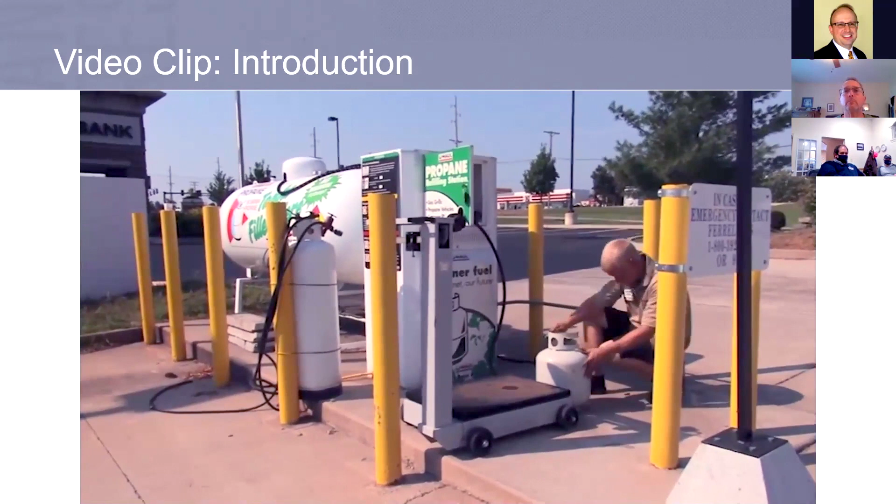One step in the pre-fill inspection identifies cylinders that are due for requalification before they can be returned to service. The purpose of this video is to be a supplement to the cylinder requalification textbook. Please make sure you thoroughly understand all of the principles, instructions, and guidelines that are in the textbook. The textbook also serves as a reference guide, as it contains many of the charts, tables, and measurements required to requalify a DOT cylinder.

Okay, pretty straightforward stuff. These are the organizations that you'll probably deal with in terms of cylinder requalification: NFPA, OSHA in terms of workplace training, DOT for transportation, EPA, don't spill anything, and the Compressed Gas Association, of which this document really takes its information from.

Now let me start off with some really good news. NPGA was very successful in convincing PHMSA, and this has been going on for a long time, that it used to be you had to have a copy of CGA 6 at the facility where you are doing a recertification of cylinders or inspections by external visual. Those books cost about $200. If you look in here, that's not required anymore from PHMSA. There's a link that gives the formal interpretation of that, or the formal directive.

As long as you have the PERC book, you do not need to have the CGA 6. What I would recommend is that in every place you do that recertification, you have the PERC book, and also download the link that talks about the PHMSA directive, which you'll see on the bottom of this handout. Bill, I believe I sent some out. I'm happy to send some more, and it's on NPGA's website.

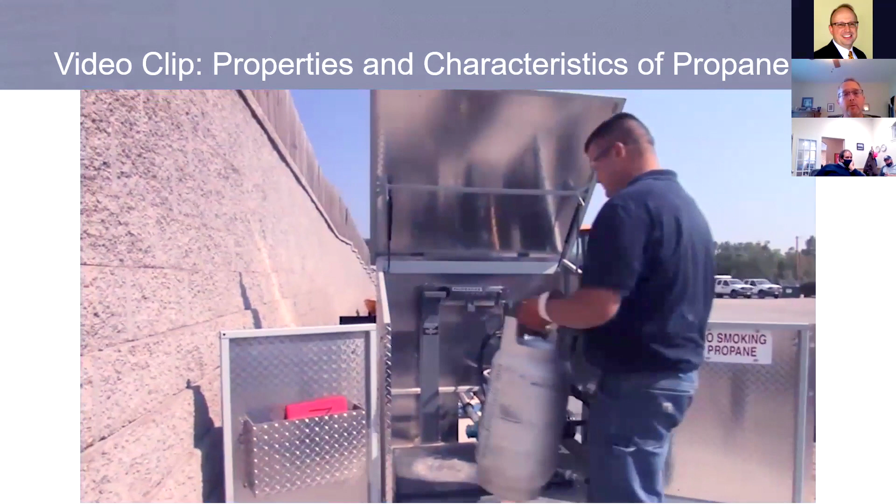The safe dispensing of propane involves knowing its properties and characteristics and being aware of safety procedures. A safety data sheet, or SDS, is available from propane suppliers or distributors and must be available and accessible to all employees at the workplace. The SDS provides important information on propane, including physical properties, health effects, first aid, safety precautions, and personal protective equipment.

Propane is stored as both a liquid and a vapor. As propane liquid turns to vapor, it expands 270 times. Because of the large expansion rate, a liquid propane leak can be more hazardous than a propane vapor leak. Propane containers are usually filled to only 80% of their capacity to allow room for liquid propane to expand with an increase in temperature.

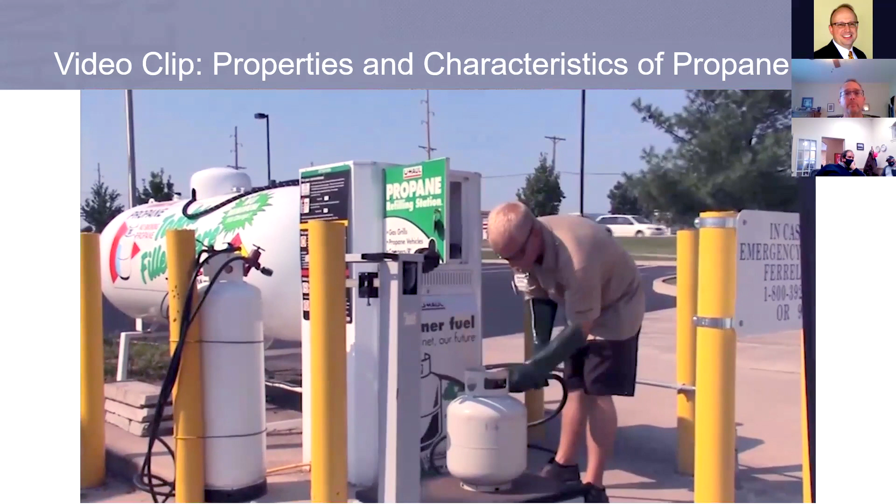Propane is non-toxic, but its vapor can be dangerous to inhale because it can displace oxygen. Since propane vapor is heavier than air, propane released in a confined space may settle in low-lying areas. However, if there is sufficient air movement, especially outdoors, the vapor will quickly dissipate in the air.

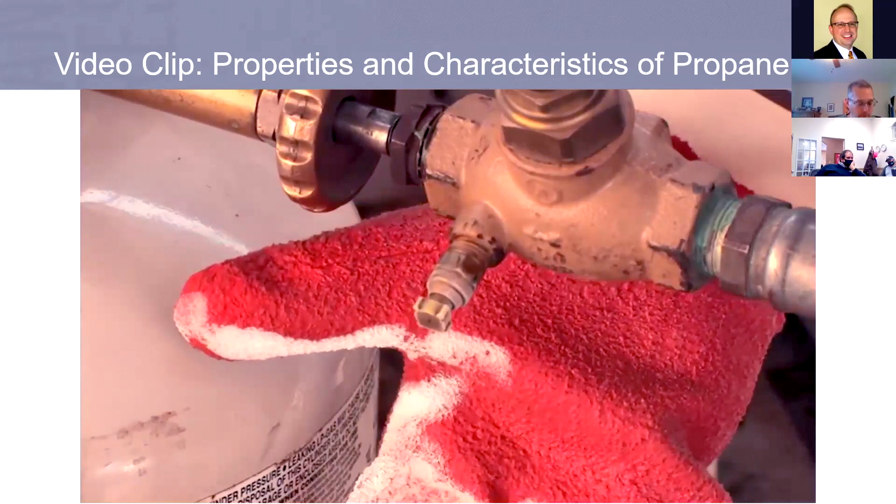Propane liquid becomes very cold when released to the atmosphere. This means if it comes in contact with your skin, it can cause frostbite or freeze burns. For this reason, appropriate gloves or other personal protective equipment resistant to propane should always be worn when filling containers. Your employer may require other safety equipment depending on your specific responsibilities, so be sure to check with your supervisor.

Propane is a fuel. It will ignite and burn under the right conditions. Three ingredients are needed to start and sustain combustion: propane, oxygen, and an ignition source. In order to minimize possible ignition sources that could lead to combustion, customers should be restricted from the immediate area around the liquid propane transfer areas.

A strong, unpleasant-smelling chemical is added to propane so you can detect it. The chemical added to propane makes it smell like rotten eggs, a skunk spray, or a dead animal. You should respond immediately to even a faint odor of propane. If for any reason you cannot recognize the smell of propane, notify your supervisor immediately. Both you and your customer's safety could depend on your ability to smell propane in the event of a leak.

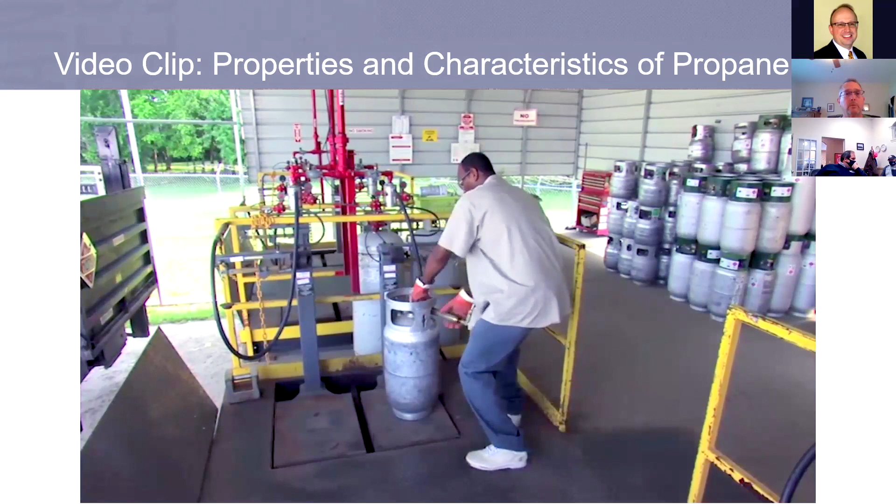You should be aware of any potential ignition sources anytime you are handling or transferring propane. Some examples include a person smoking, open flames, internal combustion engines, and static electricity. Make sure you eliminate any potential ignition sources before handling or filling propane cylinders and tanks. In the right conditions, a source of ignition, such as a static discharge or spark, may cause the ignition of some fuels, including gasoline and propane.

For more information on controlling static electricity... Okay, you all got that? All right, let's get right into it now.

DOT cylinders, we're starting on page 5. I know you guys know a lot about this, but let's go over it anyway because we've got to do it for the class. An important part of the cylinder requalifier's job is to recognize the various types of cylinders and their markings, and we need to make sure we can tell whether or not the cylinder is still within date of its last requalification.

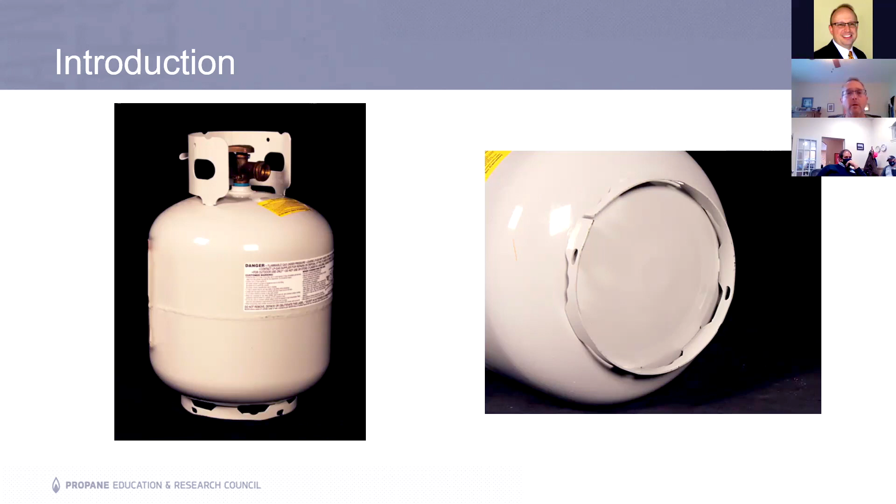We want to look at things, as you can see on the bottom here, like these rings under here that keep the integrity. If those are damaged, that's a no-no. All right, common elements of DOT cylinders.

Valves: exchange cylinders have one combination service valve, pressure relief valve screwed into the top. Vertical cylinders from 4 to 40 pound have to have OPD valves, right? We all know that. We want to make sure we know that.

Protective cylinder collar is a wide metal band welded to the cylinder body. Collars are where we have a lot of that information. You'll see, and we'll go over that in just a moment—you can see the DOT number right up here, and it'll have other information on it. As we know, we lift by the collar. Okay, ID markings—all the ID markings that you're going to look for are on the collar.

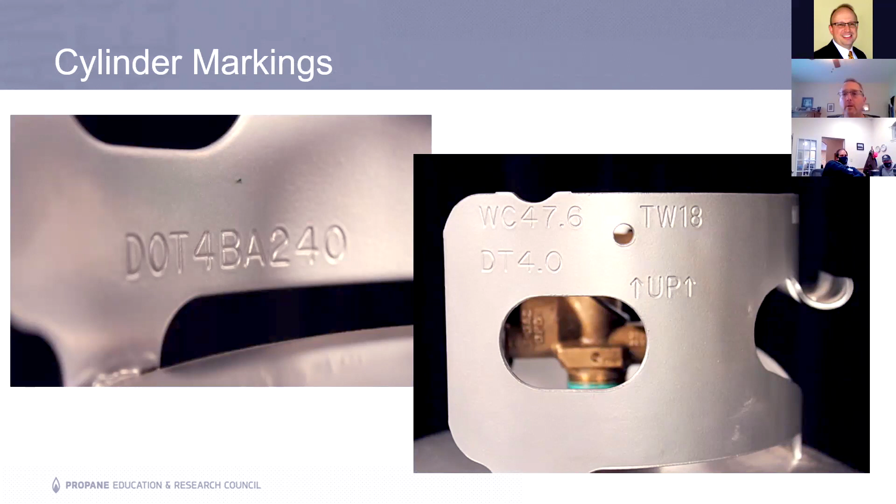Markings are required by DOT. The ID card for the cylinder has all that stuff: cylinder specification design code, service pressure, tare weight, water capacity in pounds, and test requalification date. That's where you find all those things.

Okay, let's go to pages 8 and 9 in your book. We're going to do a quick discovery activity. I'm a big believer in making sure that folks are doing stuff.

On portable cylinder markings, in the top left corner of the cylinder, you'll see cylinder tare weight is 17 pounds. Look on the collar: where's A? Tare weight, 17 pounds. B, water capacity in pounds - where do we see that? B, water capacity, WC. C, manufacturer's name.

We're going over to the other side of that collar. This one's owned by General Cylinder. Specification design code on letter D, on the third picture, has DOT 4BA240, manufacturer date on E, and on F, requalification dates. These are incredibly important - you're going to figure out whether or not the cylinder is within requalification date where it can be refilled. Let's take a look at that right now.

Requalification markings - a few years ago PHMSA put out a rule saying the volumetric expansion test went from 12 years to 10 years, and the internal hydrostatic test went from 10 years to 7 years. They have now put out a correction on that, going back to the original 12 and 10-year dates. The reason we have it this way in the book is because that was not adjudicated yet, and now we know the original dates are what those dates are.

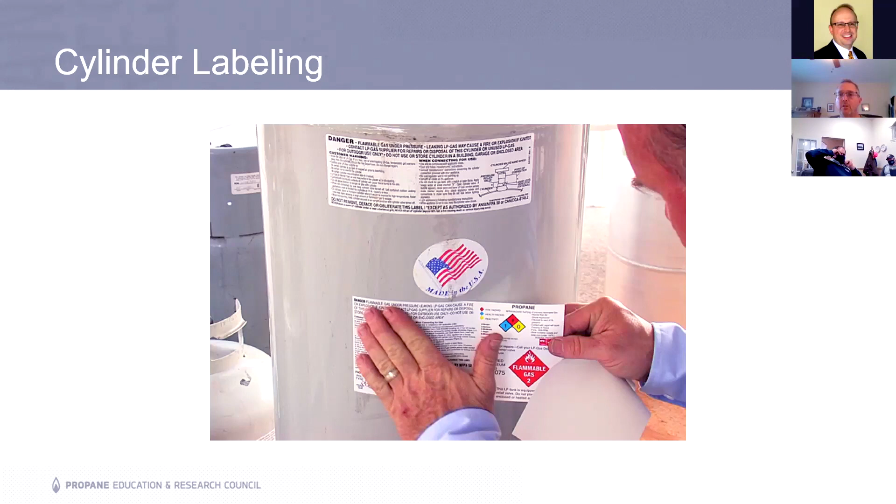All right, DOT requirements - we're going to get into it right now. And I know if I'm being repetitive, it's because I want to really make sure you really understand this information.

The process by which a DOT container must be taken out of service, retested, and found suitable for continued service on or before the required date - that's what we're talking about.

Most of what you folks are going to do is really look. You're not going to be doing the requalification, and you probably may not be putting a number on the collars. Let's talk about the different types and the dates of when a cylinder needs to be requalified, and the various other numbers on the cylinder.

We have cylinders 4B, 4BA, 4BW, 4E. Those will be requalified within 12 years. After that, volumetric testing. There are others, every 5 years after, if qualified by external visual inspection, indicate the date following. Pretty straightforward - you'll know what type of cylinder it is, right?

You'll know what type of cylinder it is, whether it's 4B, 4BA, 4BW, and where you'll find it on the collar, as we just went through a little while ago in the learning activity.

You have to be trained - that's why we're here, we're going to go through this training course. I know some classes will do this in 5 hours or so. My sense is 3.5 hours is enough information that I believe you'll be fine with this. And I know that a lot of you will go back after this class to where you are and have somebody do some hands-on training, which is also vitally important for your RIN number.

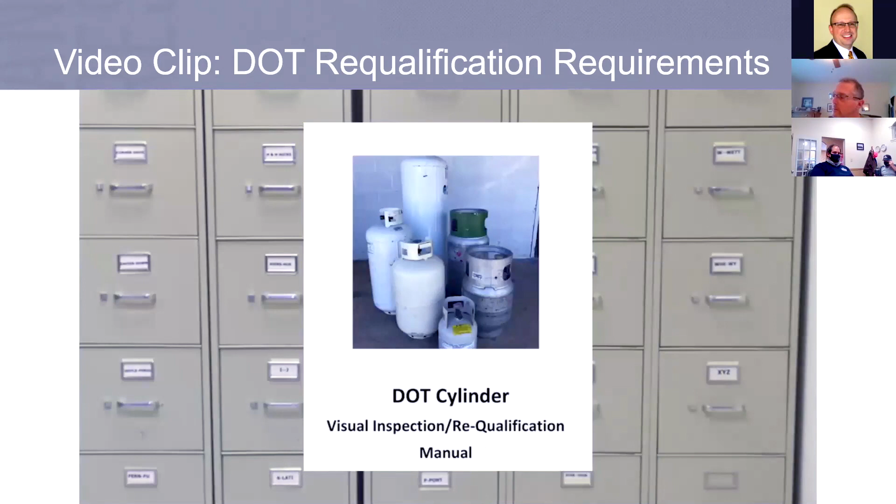A current requalification identification number, or RIN, issuance letter where applicable. Facilities must reapply for the RIN every 5 years.

Requalification record pages for external visual inspections must document the following: date of requalification, cylinder serial number, DOT specification or special permit number, marked pressure which is included in the DOT specification number, actual dimensions of the cylinder, manufacturer's name or symbol, owner's name or symbol if present, result of the visual inspection, cylinder disposition with reason for any repeated test, rejection, or condemnation, and legible identification of the test operator.

The option to use a single date for each record page is acceptable if each requalification inspection on that page is done on that date. The use of ditto marks or a solid vertical line to indicate repetition of the preceding entry is acceptable for the following entries only: date, actual dimensions, manufacturer's name or symbol if present, owner's name or symbol if present, and test operator or inspector. Blank spaces may not be used to indicate duplicate results of repeated operations.

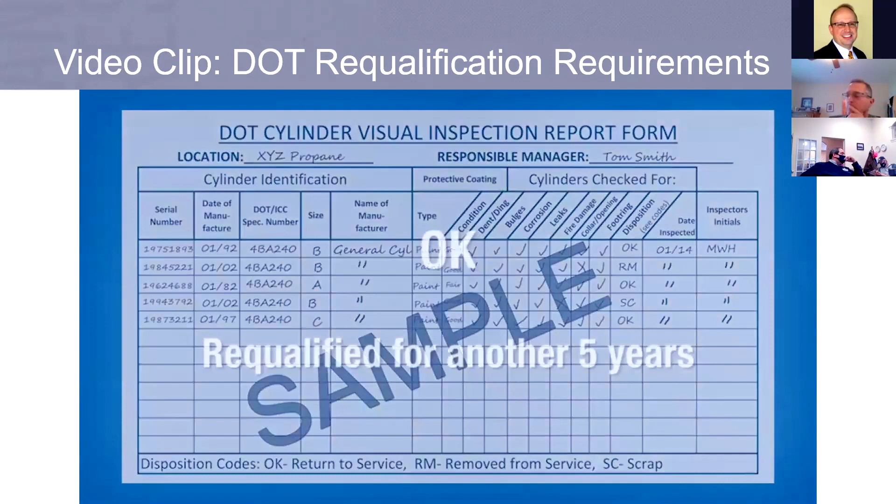OK - the cylinder has passed the inspection and is requalified for another 5-year period. R or RM - rejected or removed from service; the cylinder must be repaired or rebuilt and inspected again before it can be requalified. SC - scrapped or condemned; the cylinder must be permanently removed from service by marking the cylinder or rendering it incapable of holding pressure.

Requalification records must be maintained at the facility until either the expiration date of the requalification period or the cylinder is requalified again. That makes sense in terms of the things you could use ditto marks on, because you're going to be the same person.

Remember, it said you need to have this CGA book at the facility. But we shared with you the note, the fact sheet from NPGA, hats off to them, who approached PHMSA and said, look, we've got this great PERC book. We did it, and it's based on CGA. We think that should be acceptable to have at the facility where requalification is occurring.

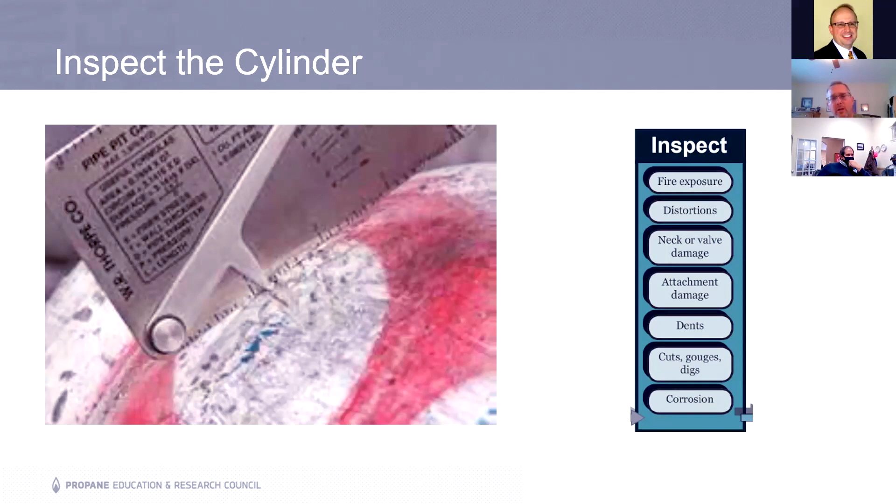If it reveals any corrosion, the cylinder should be emptied and weighed. Any corrosion, emptied and weighed. And again, we're going to get into some more of those specifics.

We're going to leak test the cylinder. I served as a subject matter expert on a lawsuit where somebody did something they shouldn't have done to the cylinder. And the fellow that filled the cylinder swore up and down, even under oath when deposed, that he leak checked all of that. He did all that. But what didn't he do? He didn't write it down. He didn't write it down.

And you know what, I hate paperwork. I really do. It can be the most tedious thing in the world, but it is just critical, and I can't emphasize that enough. Whether it's doing a gas check or leak check or doing this, the documentation is critical. And that is part also of being professional.

In the process, when you look at the cylinder, you're going to mark it again: it's okay, it's rejected, or it's scrapped. Okay, cylinder disposition, that's going to be documented. And it's just a high-end overview.

Okay, cylinders that do not pass inspection are given a disposition of rejected, removed, or scrapped, marked appropriately, and if necessary, completely removed from service. Fill out the inspection report completely. Again, just a big overview here.

Let's go to page 29 in your book for another quick check for understanding. Match the cylinder requalification task with the appropriate part of the cylinder requalification process.

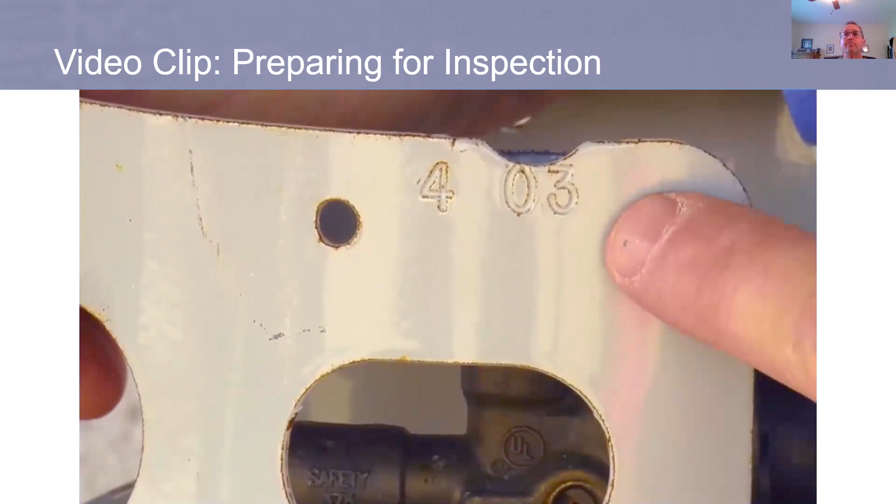Prepare for requalification. The first step is to make sure the cylinder is not leaking. If it is leaking, immediately take it out of service. Next, determine whether or not the cylinder is due for requalification based on the manufacture or requalification date. If the cylinder is not due for requalification, then a simple pre-fill inspection is to be performed on the cylinder to determine its suitability for continued service.

If the cylinder is due for requalification, then the cylinder must pass the entire requalification inspection in order to be returned to service. It is really not rocket science doing this. It's a matter of rote, doing it. It's like anything else - a matter of doing it the right way. And it's so easy for us.

Obviously, Bill, you're kidding, and I love a good joke. But it's so easy for us to take the path of least resistance on some of those things, but it's that one time where you're like, it looks okay. I got to leave, I'm going to my daughter's birthday party - whatever it might be, we all get kind of disorientated sometimes, or it's freezing cold outside.

My suggestion, and I'm not the boss, is take a break, take a deep breath every once in a while. But this is really, really critical work. It's like anything else - the 1,000th time somebody does a shortcut, it's the 1,001st time, and it could be that many times that they get into a jackpot.

And so, like I say, I don't want my doctor to take shortcuts. And even if my doctor's got to review a chart - as a matter of fact, just as an aside, there's been a trend in surgical facilities where there are checklists for doctors. Not what to do if you find a tumor, but just various protocols to make sure that they're doing it the same way, the same time. And I actually think that's a good thing.

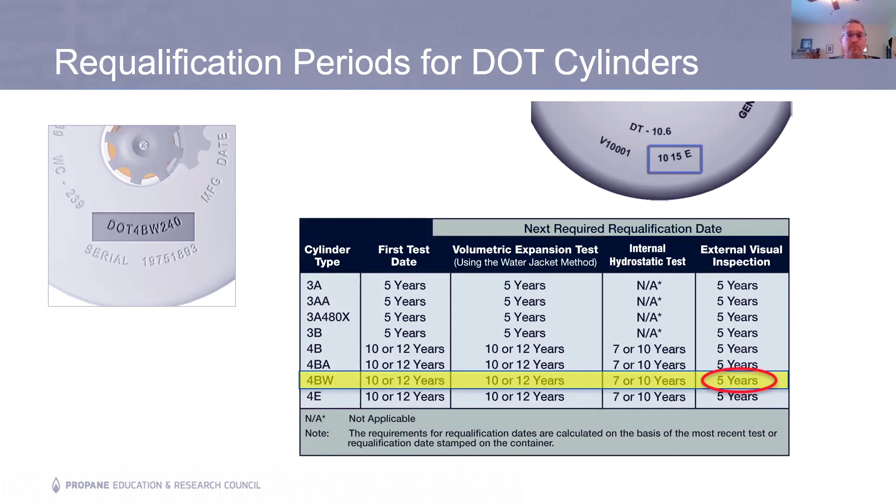Okay, let's go on page 35. Check for understanding. The following requalification dates are found on cylinders at your facility. All cylinders are 4B, 4BA, 4BW, or 4E. Using the chart below, check when the next requalification is required.

So 1014, no letter. So what does 1014 mean? Water expansion volumetric test, has to be within 12 years. This one was done October 2014. Is that within 12 years? Yes, it is. Okay, we're following the chart. We're seeing that it was requalified via the volumetric expansion test. Why do we know that? Because there is no letter next to the requalification date found on the cylinder, because it's marked 1014, no letter.

Here's the next one, 0716E. E, external, 5 years. Well, this is good for another, almost for another year, right? 16 plus 5, 21. And 512S. S means that it was requalified using the internal hydrostatic test. How do we know that? Because it says S on it. And those that are requalified using the internal hydrostatic test are good for 10 years.

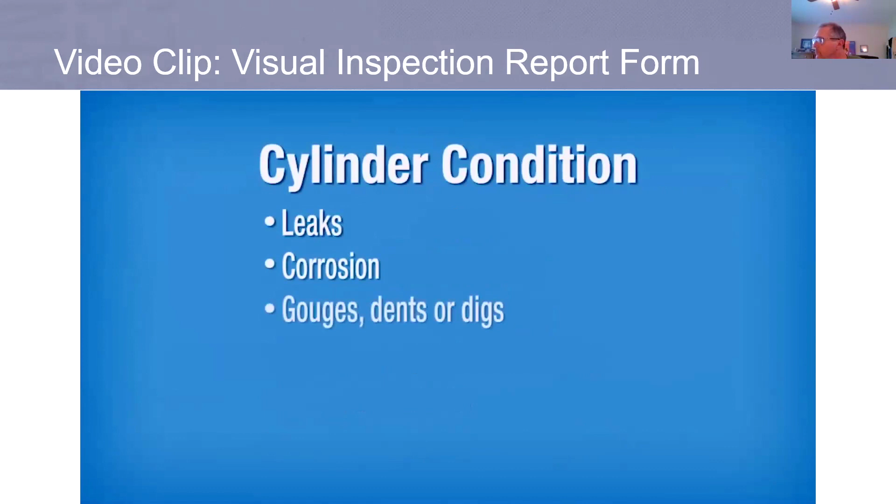Type of cylinder protective coating, including a statement as to need of refinishing or recoating. Conditions to check for on the cylinders, for example, leaks, corrosion, gouges, dents or digs in shell or head, broken or damaged foot ring or protective ring, or fire damage.

Cylinder disposition: return to service is indicated on the form with OK. Rejected, removed from service, hold for repairs is indicated with R or RM. The reason for the rejection must also be documented. Scrapped, condemned is indicated with SC. The reason for the condemnation must also be documented. Legible identification of the inspector.

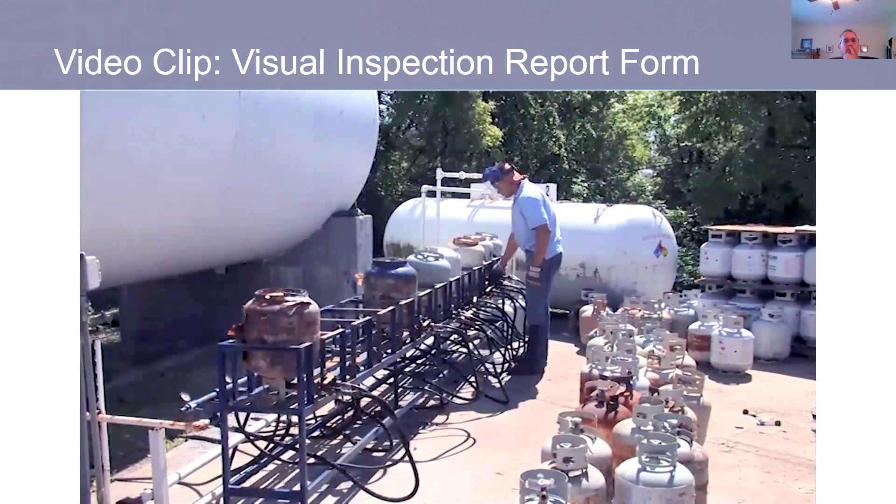If the cylinder to be requalified contains liquid propane, it may be required to be emptied or evacuated before proceeding with the inspection. Identify which cylinders need to be evacuated. Only evacuate a cylinder if you have the appropriate equipment and are trained to do so. Contact your fuel supplier if you are not qualified or do not have the equipment to evacuate a cylinder. Attempting to evacuate a cylinder without the appropriate equipment and training can create a hazardous situation.

All right, let's go to page 36. We're going to take a look at a visual inspection report. There's one here. I suspect you can make up your own, or go to any number of online facilities. So again, the first thing you're going to do is obtain that visual inspection report form.

We talked about it's either OK, it's good to go, rejected, removed from service, hold for repairs, and the reason that it was rejected, and scrapped, condemned, indicated on the form with the reason for the condemnation as well, and try to be as legible as possible.

Let's talk a little bit about cleaning and preparing the cylinder, and then we're going to go back to the book. To properly clean and prepare the cylinder for inspection, you must make sure that you are working at a safe distance from flammable liquids and combustible materials.

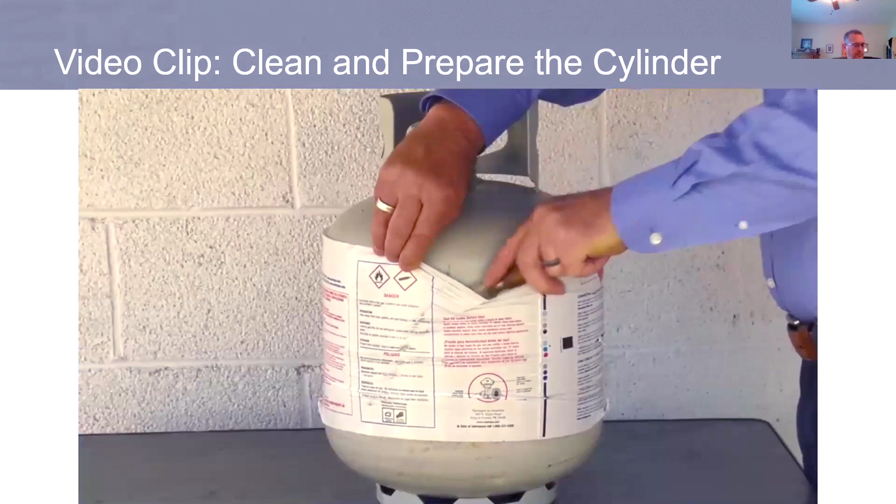Remove the cylinder sleeve if present. Remove any rust, scale, caked paint, or other foreign matter from the exterior surface of the cylinder. Remove any coating, rust, or scale from welds and joints where any part is joined to the cylinder body. Mark any area of the cylinder where a dent, dig, cut, corrosion, or fire damage is evident, using chalk or another non-permanent marking device.

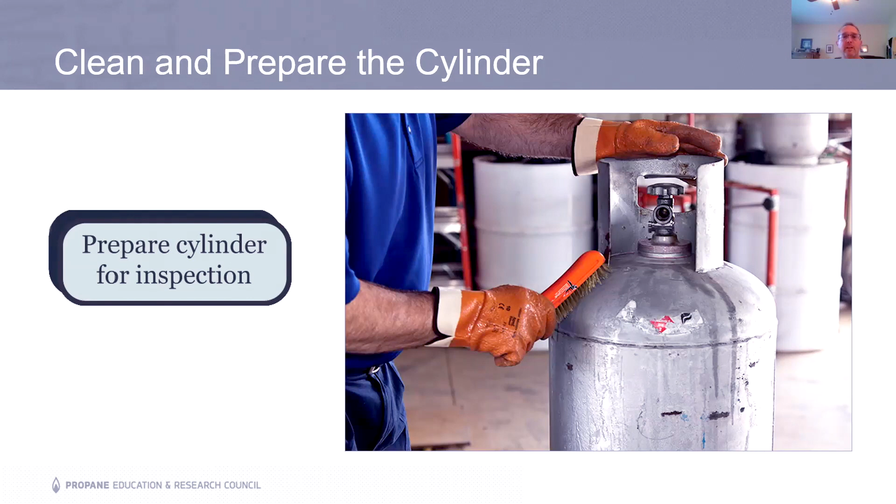Okay, let's talk about preparing the cylinder for inspection. Remove the cylinder sleeve. If present, remove any rust or paint, because it could hide some of the issues with the cylinder. Make sure you're working a safe distance, keep away from flammable materials. We know we want to remove the sleeves, and we want to pay special attention to welds and things of that sort. We're going to look for fire damage and other obvious things.

Okay, let's go take a look at page 38. We're going to do a check for understanding. When preparing to perform a requalification inspection, what must you do? A: remove any rust, dirt, or caked paint from the surface of the cylinder. You must also obtain a visual inspection form and determine the requalification date.

So let's talk about performing inspections on a steel cylinder. Look, now we're on page 39, where we're taking that piece of the big decision tree and just focusing on inspecting. For obvious reasons, this is the biggest part of the process because it has all of the parameters that you will need to inspect.

And as we look through this part, as we study this, we take a look to see the decision tree. Is there fire damage? Yes. Can the cylinder be requalified? Well, can it? We're going to talk about that. Either reject it or condemn it. Is there fire damage? No.

Cylinder distortion, more than 1%. We'll talk about how we do that. Can the cylinder be repaired or requalified? Then you make your decision. As we mentioned earlier, sometimes for financial reasons, you're better off scrapping the cylinder because it could be too expensive, right?

Say there's excessive fire damage - a volumetric expansion test or water jacket method can be fairly pricey. So a lot of folks think, the fire damage is so extensive, I've got a number of them in my yard, it'll be cheaper for me to just purchase new cylinders.

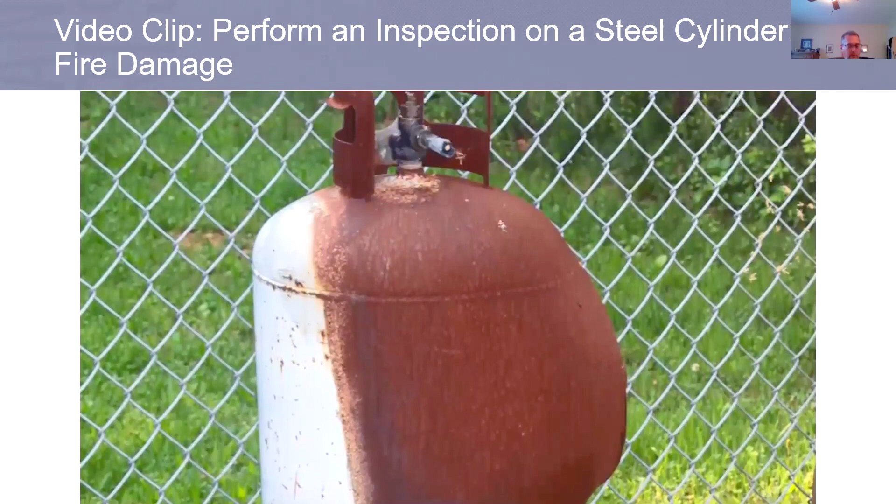Regulations state that a cylinder subjected to fire shall not be placed in service until it has been reconditioned properly. Typically, exposure to fire is determined by visual examination, with attention paid to the condition of the protective coating as outlined in C6. If there is evidence that the protective coating has been burned off any portion of the cylinder surface, or if the cylinder body is burned, warped, or distorted, assume that the cylinder has been overheated. But if the protective coating is only smudged, discolored, or blistered, and is intact underneath, the cylinder is not considered affected within the scope of this requirement.

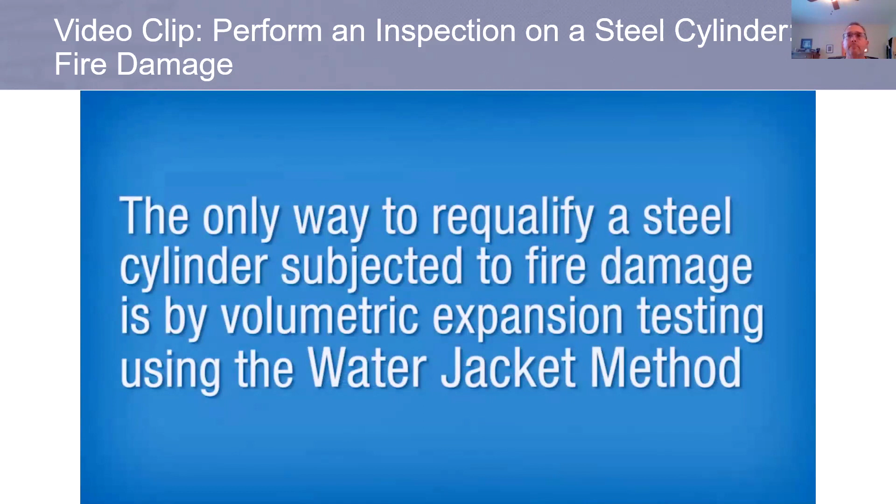However, if there is significant fire damage, contact your fuel supplier. Some companies may reject fire-damaged cylinders and send them out for testing, repair, and requalification. Others may choose to condemn cylinders in the same condition. The only way to requalify a steel cylinder subjected to fire damage is by volumetric expansion testing using the water jacket method. If your company sends cylinders out for this type of testing, reject the cylinder, noted with R or RM on the form, because of fire damage, if any of the following are present.

Valve is burned or melted. Paint or protective coating is burned or charred. Cylinder body is burnt, warped, or distorted.

If your company does not send fire-damaged cylinders out for water jacket volumetric expansion testing, a cylinder showing any of the rejection criteria listed previously must be condemned and noted with SC on the form rather than rejected.

Right, and remember, a lot of employers and managers will say, I'm just going to destroy it. They will condemn that cylinder and destroy it because financially it just doesn't pay to do the water jacket expansion method. Doesn't mean you can't do it, it just becomes a financial decision.

So we talk about fire damage to cylinders, and it happens a lot. We want to look for things like charring or burning of the paint or other protective coatings, burning or scarfing - when we say scarfing, it gives a really nasty texture to the metal of the cylinder. Has it distorted the metal or the cylinder, or burned or melted off the valves?

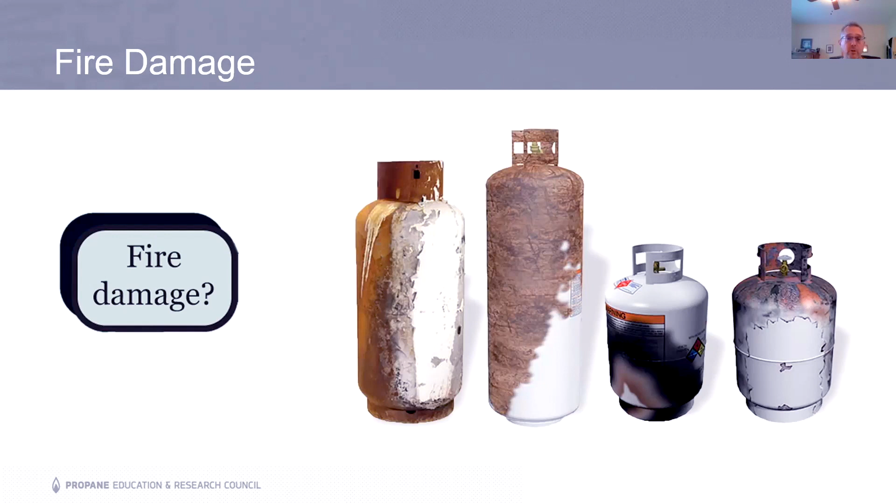Now friends, I know we have all seen cylinders that should not be in service. What are there, 60 million cylinders out there? There's plenty of them that shouldn't be out there. Again, you're the first line of defense to try to ensure that does not happen.

So to ensure that paint is not damaged, wash off the soot, right? We talk about cleaning - we don't know, maybe it's just some soot on it. Look for excessive distortion, bulges, is it leaning? If the cylinder doesn't show any significant evidence of fire damage, then you'll go to the next step in the requalification process, based on your company policies and what it says here.

So, got some fire damage. Can the cylinder be requalified by water volume expansion test? Remember, if there's fire damage, it must be requalified. If it's going to be requalified,

using a water jacket method, also known as a volumetric expansion test. Just moving on, I'm following the book. We're on page 42, rejection criteria for fire damage. We mentioned the only way to requalify a steel cylinder is by the volumetric expansion test.

If your company, or if you send the cylinder out for this type of testing, reject the cylinder because of fire damage if there are any of the following: valve is burned or melted, paint or protective coating is burned or charred, cylinder body is burnt, warped, or distorted.

You reject it, and then you make your decision as to whether you want to have that requalified by the water jacket method, or you're just going to condemn it, and mark it as such on your form, and then proceed to step 4 in the decision chart, which is process.

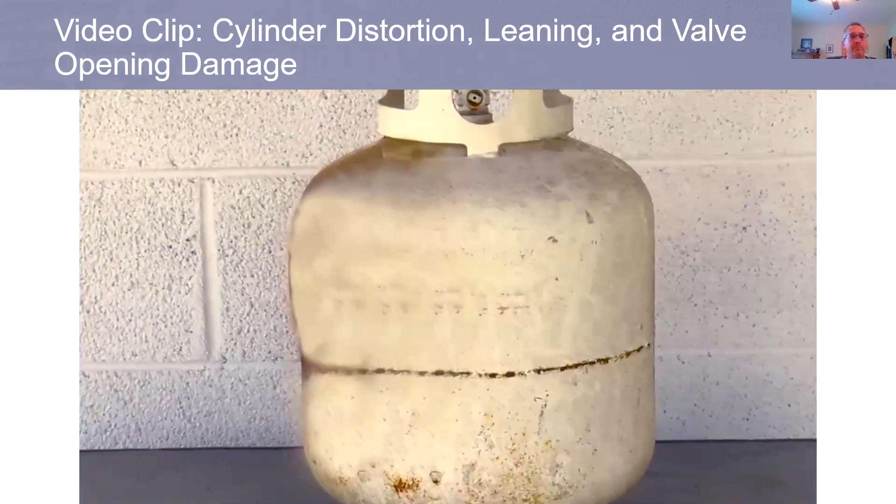If the cylinder shows no evidence of fire damage, check to see if the cylinder is distorted. Determine if the cylinder is distorted to the extent that it no longer supports itself or has bulged in one or more areas on the body.

Cylinders that have visible distortions or bulges must be removed from service. If you are unsure if a bulge is within acceptable limits, consult with your supervisor or contact your fuel supplier. Cylinders with more than 1% distortion must be scrapped or condemned. Cylinders in this condition may not be rejected and repaired. Use the measurements to determine if the cylinder distortion exceeds 1%.

Check whether the cylinder is leaning. Place the cylinder on a solid, level base. Position it in the same manner as it is when in service. Check the cylinder for excessive leaning due to a damaged or distorted foot ring. If the cylinder is leaning to the extent that it could easily tip over, it must be either rejected, removed from service, or scrapped or condemned.

If the damage can or will be repaired, reject the cylinder and proceed to processing. If the cylinder is leaning and cannot be repaired in this condition, then condemn the cylinder and proceed to processing.

Determine if there is damage to the cylinder valve openings or neck. Stationary and motor fuel cylinders usually contain more than one opening. In either case, check all valve openings for damage. To complete this step, visually check for cracks, folds, and other flaws in the neck or area where the valve openings are joined to the top of the cylinder.

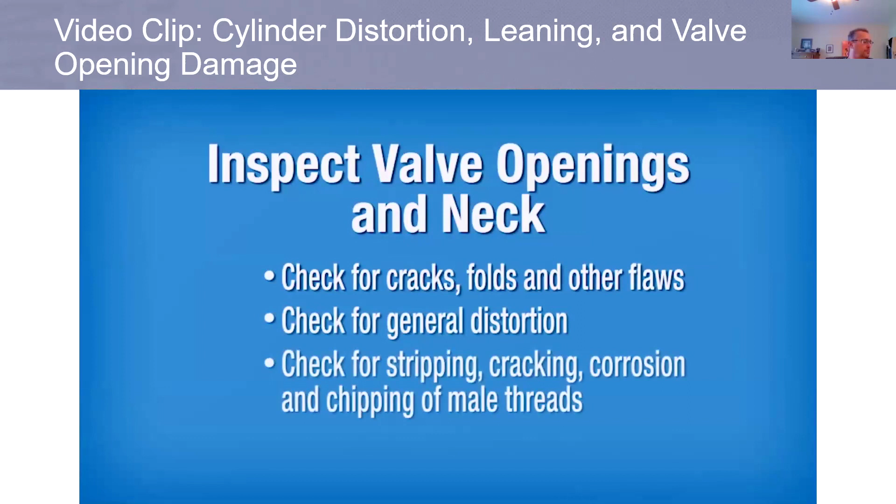Check the neck or valve opening for general distortion. Where applicable, check for stripping, cracking, corrosion, and chipping of the male threads used for mounting the protective cap to the cylinder.

Cylinder neck threads are examined whenever the valve is removed from the cylinder. Cylinders have a specified number of full threads of proper form as required in applicable thread standards. Acceptance criteria for continued use of the cylinder threads require the following: at least 5 continuous full threads for tapered threads on propane cylinders, and no visible cracks in the threads or adjacent visible areas.

No visible damage from corrosion or other sources that might adversely affect the structural integrity of the threads or valve installation. Cylinders manufactured to a specification with less than the previously mentioned number of threads need to retain all threads in a full, continuous, undamaged condition for requalification and/or continued service.

If the cylinder shows damage to the valve openings, your company may choose to reject, remove it from service, and repair cylinders in this condition, or simply scrap or condemn them. Reject or remove from service the cylinder due to valve opening damage, noted with RM on the form.

If any of the following are present, the cylinder must be rejected: the neck or valve opening is noticeably tilted or sunken, or the neck or valve opening is cracked. Scrap or condemn the cylinder, noted with SC on the form, due to valve opening damage if any of the previous rejection criteria are present and the cylinder will not or cannot be repaired. All right, so there's a lot to this, isn't there?

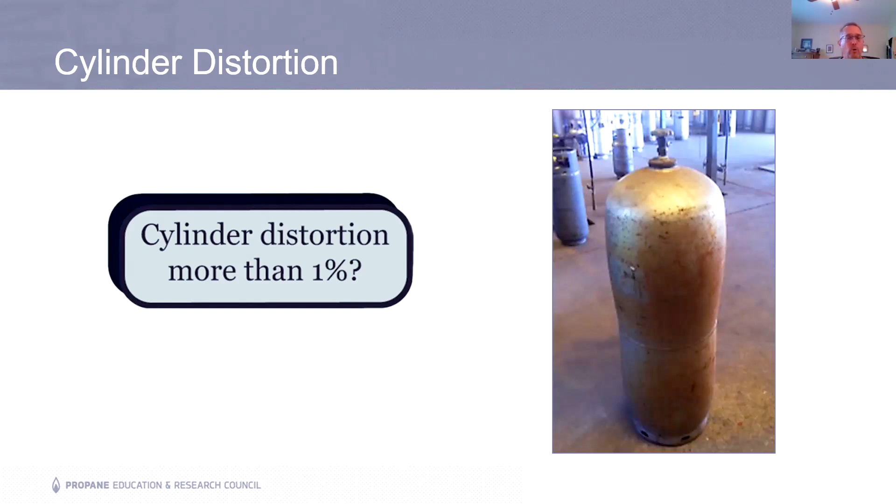Okay, cylinder distortion more than 1%. Now, if anyone listening could tell just by looking at a cylinder that its distortion is more than 1%, you have incredibly valuable skills. Absent that, we're going to measure some of those distortions. So how do we know whether or not something is distorted? You're going to look on page 46 and 47. If you can't retain the information right now, it's very straightforward right here.

We know that cylinders that have visible distortions or bulges have to be removed from service, full stop. If you don't know, you contact your fuel supplier.

What you want to do is, with a 6-foot minimum tape measure, measure and mark halfway between the top of the cylinder and the bottom of the cylinder. Draw a line around the cylinder at the mark. If you can use the waist seam, that'd be great.

Measure and record the distance from the center of the cylinder to the service valve. From here down to here, we've gone halfway and marked it. We've done the same thing from the service valve to that halfway mark. Repeat this step three times, so you've got three various marks.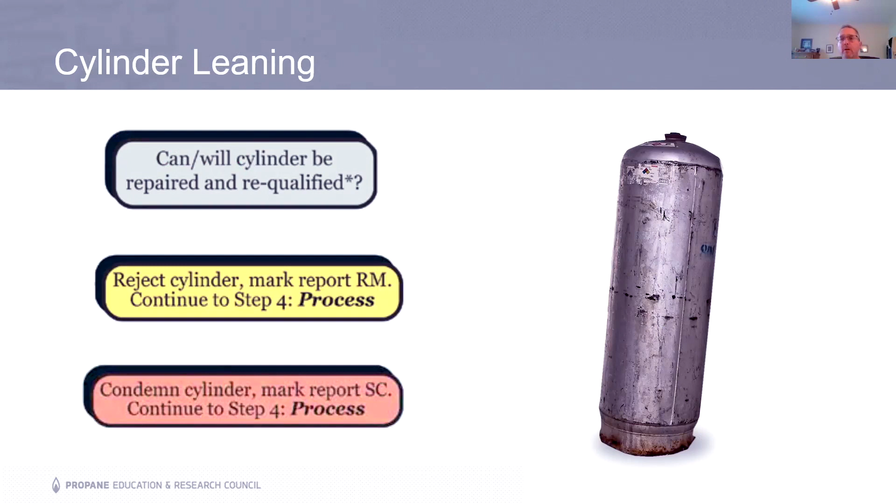If the cylinder shows excessive leaning, you can either reject it or condemn it. These are all the criteria you're going through.

If we look on page 49, we're talking about damage to valve openings. This is the issue that happened with the Philadelphia food truck explosion, that later the two ladies succumbed to their burns. They died. Apparently the valves were just in such bad condition. The whole thing was rusted out.

So again, you may want to say to somebody, say it's a refill operation that you're operating. You have a dispenser on site, or you're teaching your dispenser operators or third party that you deliver propane to. They've got to look at these things. I mean, they just have to look at them all the time, and it's a real challenge.

Okay, when we talk about neck, right, it refers to the service valve opening in the cylinder. Stationary motor fuel cylinders contain more than one opening. Check all valve openings. Check for cracks, folds, other flaws in the neck. The valve openings are joined to the top of the cylinder. Make sure that they're good to go.

Check the neck and valve opening for general distortion. Some of these things you do very quickly. And where applicable, check for stripping, cracking, corrosion, chipping of the male threads used for mounting the protective cap. I want somebody to take care of my family and check these things.

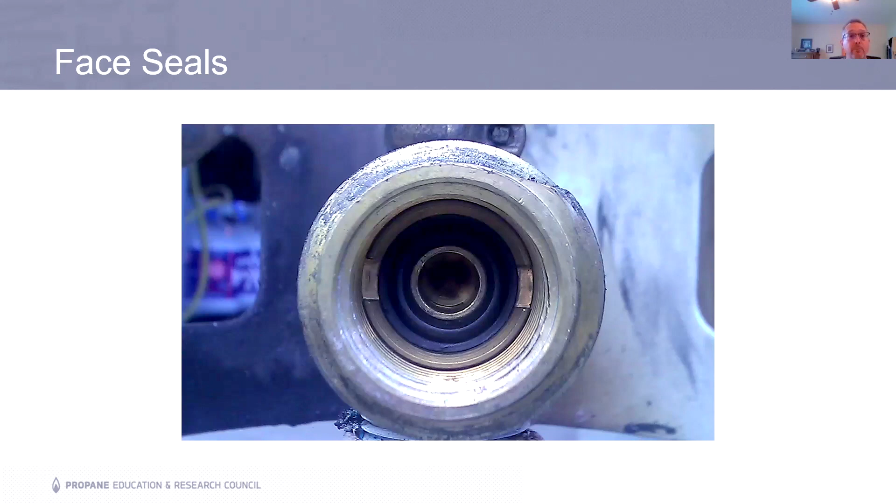And I'm talking about the O-rings right in here. This one, right, it's pretty good shape. If we look here, you can see some damage here. Again, we're looking at the seals, the O-ring. And here, remember the Challenger? The Challenger spacecraft blew up because of a faulty O-ring. Sometimes it's the little things that could really ruin your whole day.

Valve openings, damage. Okay, we're now looking, can the cylinder be repaired or requalified? You've looked at some of those things, you've looked at those openings. Can we repair them? Rejection, condemnation criteria for valve openings.

Right? This is when we go to the process. That's where you'll put in your process report, in your report, the various process. That process is the last step, requalify or condemn.

Not only if the neck is a little damaged, but what if it's kind of sunken in or receded into the cylinder a little bit? That also needs to be set aside. And again, it'll be a financial decision whether or not it's sent out for requalification or whether or not it's condemned and scrapped.

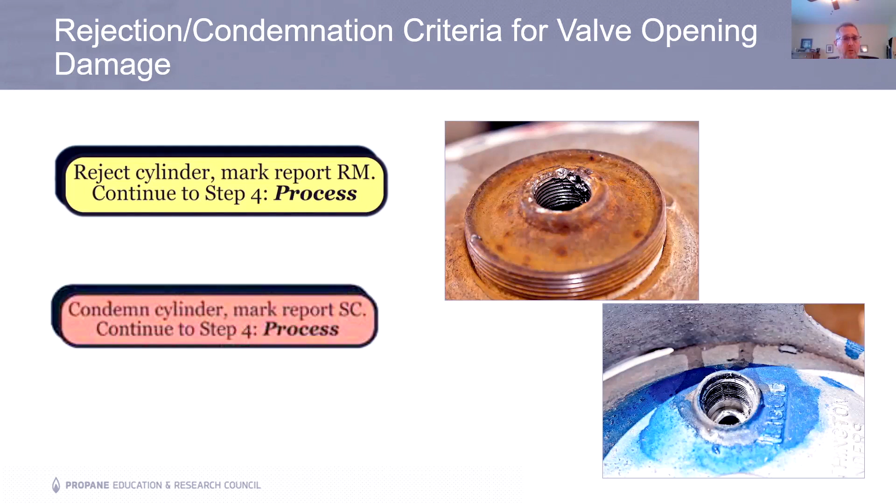On page 53, we have another check for understanding. The term neck refers to the service valve, the service valve opening in the cylinder that contains only one top opening of the service.

Now, friends, I have no problem going over these with you and just giving the answers, and we'll do that at the regular quiz, because this is really not a test for certification. We never do this in a CETP class or a test for formal certification. So I'm doing this just so we speed things along. If we were in a classroom setting and had more time, I'd probably be doing this at a bit slower pace.

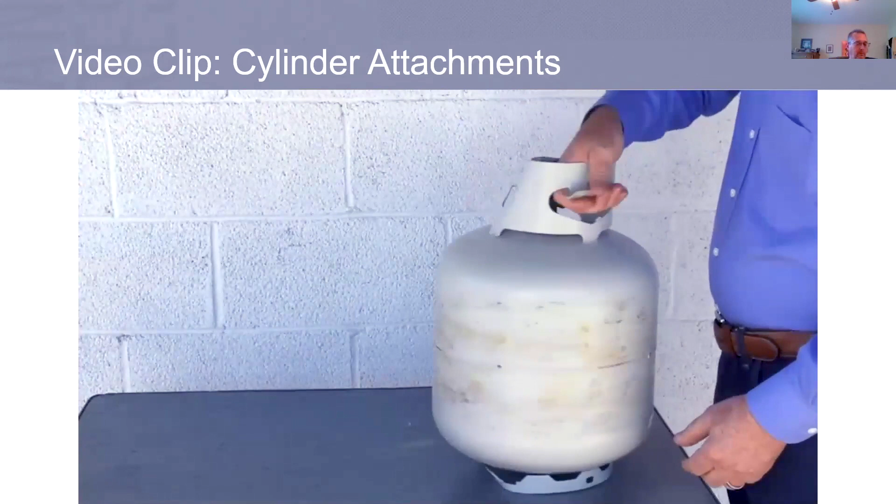Check all cylinder attachments for serviceability. Do the following checks: inspect the collar. Look for distortion or damage that would limit or prevent it from protecting the cylinder valves. Look for corrosion or cracking where the collar joins the cylinder body.

Next, invert the cylinder and inspect the foot ring or supports. Look for distortion that would prevent it from supporting the cylinder properly in an upright, stable position. Look for cracking or corrosion where it joins the cylinder body.

If the cylinder shows damage to the attachments, your company may choose to reject or remove from service and repair cylinders in this condition, or simply scrap or condemn them.

Reject or remove from service the cylinder noted with RM on the form due to cylinder attachment damage if any of the following are present, and the cylinder may be repaired based on your company policy: the collar is loose or shifted, damaged to the extent it cannot protect the cylinder valves, or weld points are damaged or cracked. The foot ring is loose or shifted, damaged to the extent it cannot support the cylinder in a straight or upright position, or weld points are damaged or cracked.

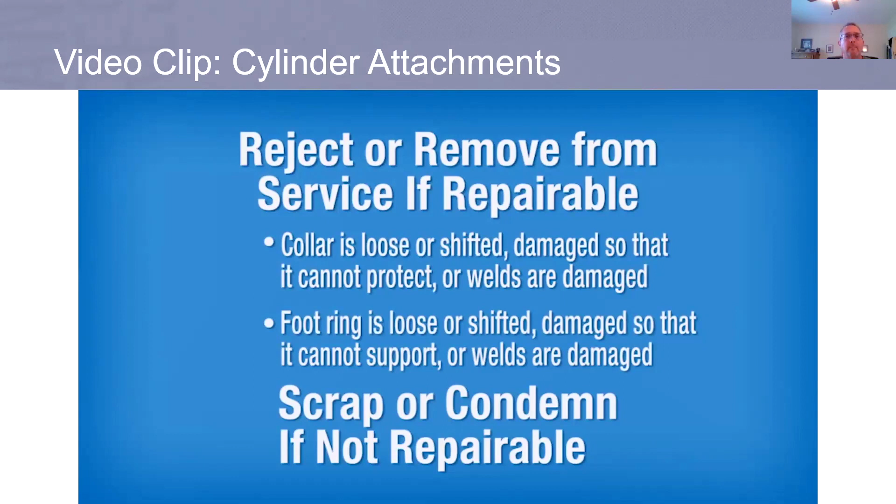Scrap or condemn the cylinder noted with SC on the form due to cylinder attachment damage if any of the rejection criteria above are present, and the cylinder will not or cannot be repaired based on your company policy.

Okay, now again, it's a lot to go through. Some of these things are a pretty quick look. It'd take you a short period of time to look and see whether those attachments are damaged or not. So I never knew that there were sometimes false bottoms to cylinders. And if there is a false bottom, it means it's been tampered with. Maybe somebody is trying to get something across the border that they shouldn't. But I've never encountered that. But apparently it is a thing that you may encounter.

So we look at cylinder attachments for serviceability, inspect the collar for distortions or damage that would limit or prevent it from protecting the cylinder valves. We know how critically important it is to keep those valves protected. Look for corrosion or cracking where the collar joins the cylinder body. Look for a change in position of the collar relative to the original position at the time the collar was attached to the cylinder. So sometimes when we look at this position, things get bent.

It's kind of like I like to use the example of a paper clip. You can bend the paper clip a lot of times, but sometimes the last time you bend it, it breaks. Kind of like us, and the older we get, we can bend a lot, but then we've certainly got to be careful. Same thing with the integrity on some of these things.

You think about the wear and tear these cylinders go through. We'll talk a little bit about stationary cylinders at someone's home where the process is not so vigorous, because the thought is they're not thrown around a lot, they're pretty much where they are. Some of these cylinders really go through an awful lot of abuse that can cause damage.

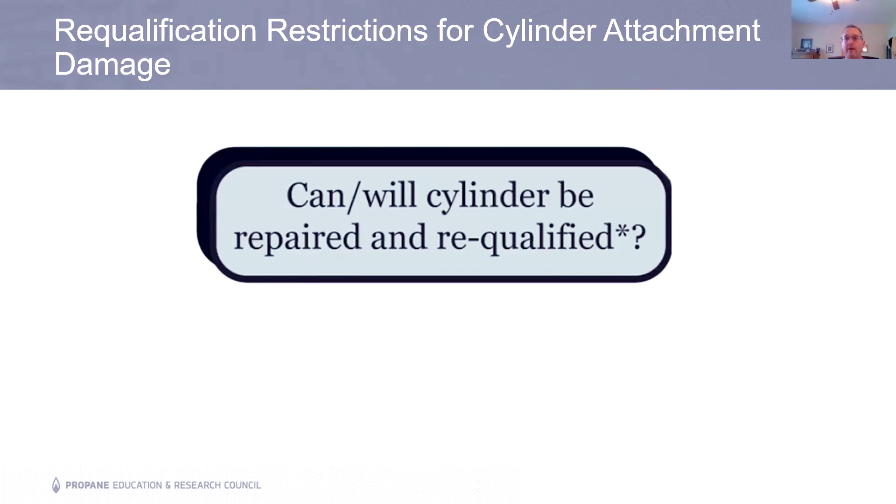And then you're going to go back to the chart to make a decision on the process. Can the cylinder be repaired or requalified? You will be saying this, I suspect, in your sleep. To make the decision to reject the cylinder, mark in the report RM, and continue to that process where you're setting it aside.

Condemn the cylinder, mark in the report SC, continue to that process where you're going to mark that cylinder appropriately and set it aside in a safe place. So you can see it's a redundant kind of thing.

It's a matter of getting you to use the book, and we're going to use some of the tables even a little bit more. On page 58, we're going to have another check for understanding.

The question being, what's the proper answer? To inspect the cylinder foot ring supports, you must empty the cylinder. No, you don't have to do that. You have to invert the cylinder, just as we just mentioned a little while ago.

We're going to go about another 20 minutes or so, maybe less, and then we'll probably take a very short break. Now we're looking at dents. We've looked at fire damage, valves, leaning, a number of things. Now we're going to look at dents. We're going to show a quick video, and then we're going to go back to the book.

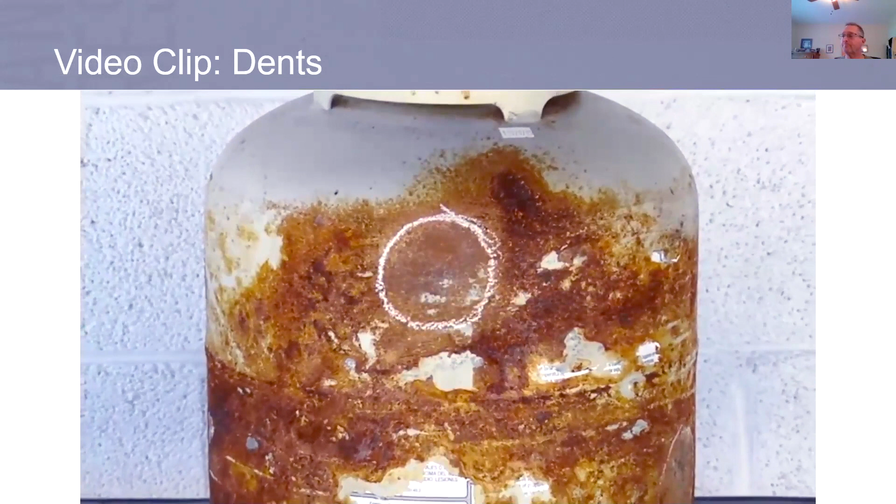If the cylinder attachments have passed inspection, check to see if the cylinder has any significant dents. A dent is an area of the cylinder that is deformed or pushed in by colliding with a blunt object. Typically, a dent does not reduce the thickness of the metal. It could if the dent is deep and confined to a small area or is near a weld. For these reasons, dents in the cylinder must be measured and checked carefully.

Cylinders that have dents that meet or exceed the following conditions are considered out of tolerance: are on a weld and more than 1/4 inch deep, or are not on a weld where the depth of the dent is greater than 1/10 of the greatest dimension of the dent, or exceed the maximum allowable dent depth for the average diameter as shown in the chart Maximum Depth of Dents allowed for DOT and ICC cylinders.

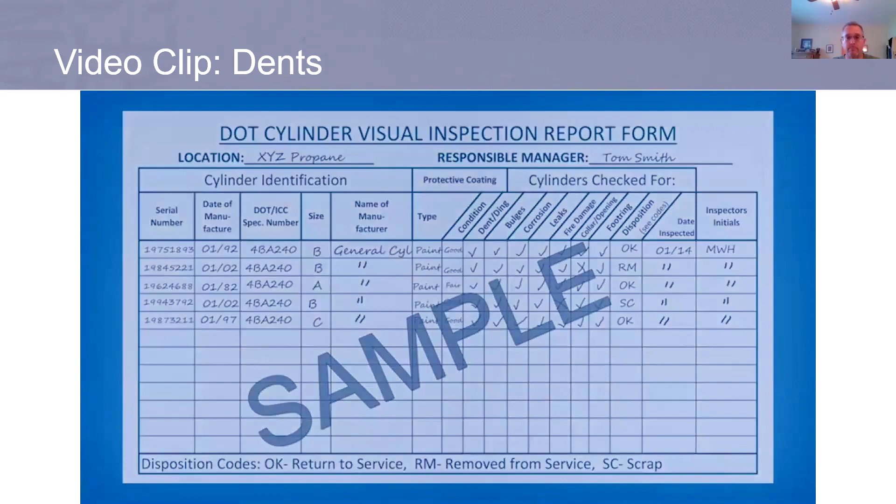If you discover that any of the dents are out of tolerance based on your measurements, scrap or condemn the cylinder and proceed to processing. Cylinders with dents that are out of tolerance may not be rejected and repaired. They must be condemned. Refer to the minimum allowable design thickness table in the book.

So a dent's a dent, right? But some of them are allowable and some aren't. So what you want to do is, when a dent is detected, obtain 2 carpenter or metal straight edge rulers, locate the dent, check if the dent includes a weld. Use a straight edge to measure the overall diameter dimension of the dent. Measure the dent depth to the nearest 100th of an inch using an industrial depth gauge.

You may have some of those, and there are now digital ones as well. I've never seen one, but I'm told that there are. And record the greatest dimension of the dent and depth.

On page 60, you will see your damage limits for cylinder dents table. This is what we're looking at. We've got something like this. We want to measure those dents, measure the circumference, measure the depth. And then from that, we will determine whether it is acceptable or within various limits.

We'll do some learning activity on that. Now, of course, if there's a dent on a weld, that's more significant than a dent elsewhere for obvious reasons. The weld is a weaker part of the cylinder, so we want to pay special attention to that. So if there's a weld dent more than 1/4 inch deep, or it's not on a weld where the depth of the dent is greater than 10% the greatest dimension of the dent, or it exceeds allowable limits, we'll pick that up in this chart.

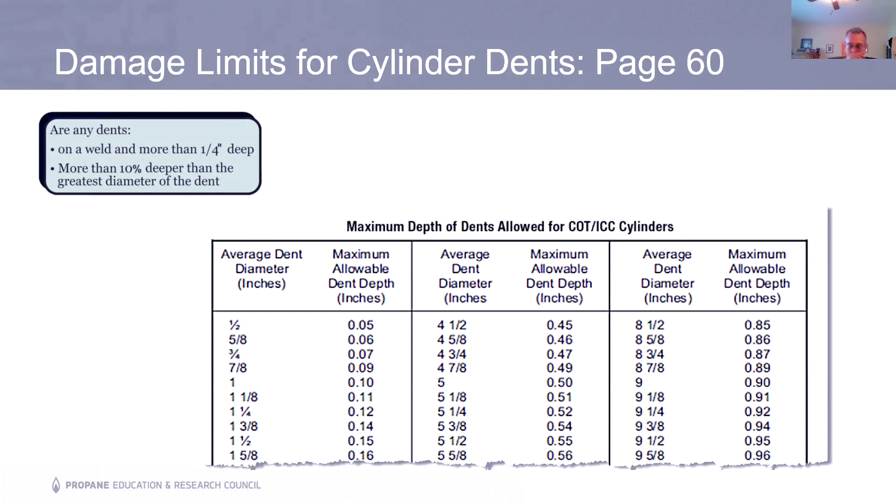And then you will also, once you do that, you will go to your process. Let's go to page 62, okay? This is a learning activity, and we're going to refer back to the chart on page 60. Again, if we were in a classroom with more time, I'd say do this on your own. We'll get back to it, we'll talk about it, but let's just do it together, all righty?

So number one: a steel cylinder has a dent that is not on a weld, but could be out of tolerance for requalification. After measuring, you find that the dent is 0.35 inches. The average diameter of the dent is 2.78. Now we know that information. We go to our chart and take a look. The average dent diameter, as we have looked at, is 2.78 inches. We go down, we're on the far left of this chart.

We go down, down, down to 2.78. The maximum allowable dent depth, which is not on a weld, is 0.29 inches. But what we have is the average dent depth here is 0.35.

So we went to the chart. First, we measured the diameter of the dent at 2.78, and the dent depth at 0.35. We went to the chart and looked to see what is the maximum dent allowed based upon a dent diameter of 2.78 inches. We came up with 0.29 on the chart. But as we measured the dent on the cylinder, it was 0.35.

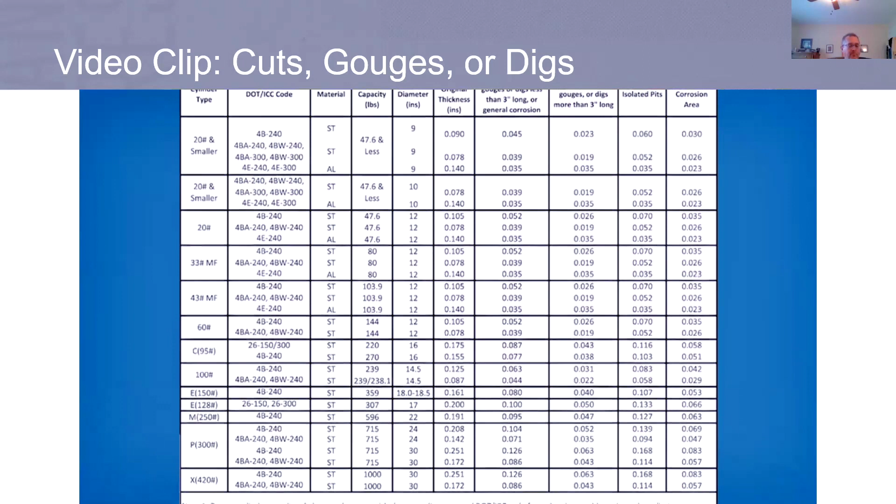Based on your measurements and the damage limits shown on the LP gas cylinder damage limits table, you must consider whether any of the cuts, gouges, or digs are outside of the specified damage limits. If you discover that any are outside of tolerance based on your measurements, scrap or condemn the cylinder and proceed to processing. Cylinders with cuts, gouges, or digs that are out of damage limits must be scrapped or condemned. They cannot be repaired.

So, just like we saw before, we've got a chart on page 63 that gives the minimal allowable design thickness based upon various specifications as it applies to the cylinder. Let's go through some of those things.

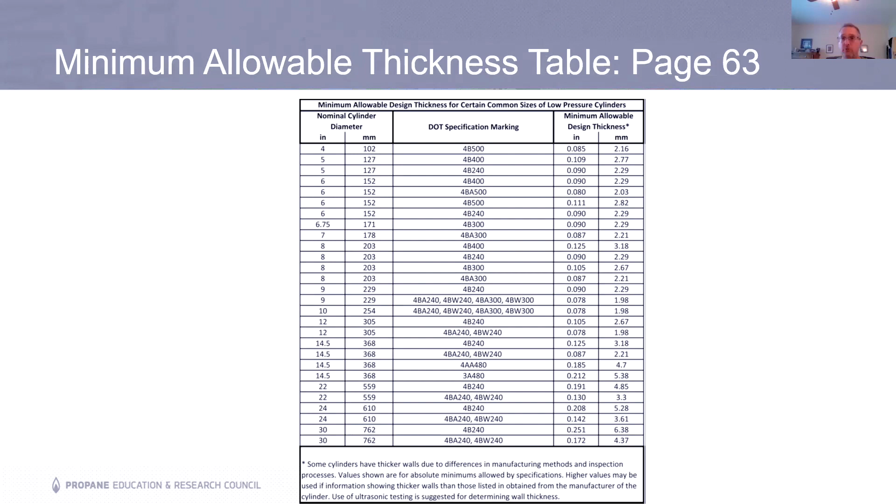If you want to have a pit gauge, you can also have them electronically or digitally. Let's say you want to make sure that these pits are not excessive tolerance because it could weaken the steel. Weakened steel is problematic, of course, since we're having product under pressure. Again, use a carpenter's rule or industrial depth gauge.

Locate the cut, gouge, or dig on the cylinder's body. As you can see, we're right in there. You're going to measure the overall length of the cut, and then you're going to measure the depth of it with a pit gauge, as we've shown here.

Let's say we have the pit gauge here. This here is representing this cut and the depth of that cut. You put your pit gauge inside where that gouge is. Here's the original thickness, there's the gouge. You're going to measure that up against the original wall thickness.

This is a perfect example, ladies and gentlemen, of some of the things that I would definitely recommend doing as hands-on training, or just as a hands-on refresher for yourself.

Let's do these things if you've not done them before, or even refresh yourself, looking to get your RIN number. We have a pit right here. Look on the cylinder bottom, it's the same way. You measure it across, and you'll measure using the pit gauge the depth of that cut.

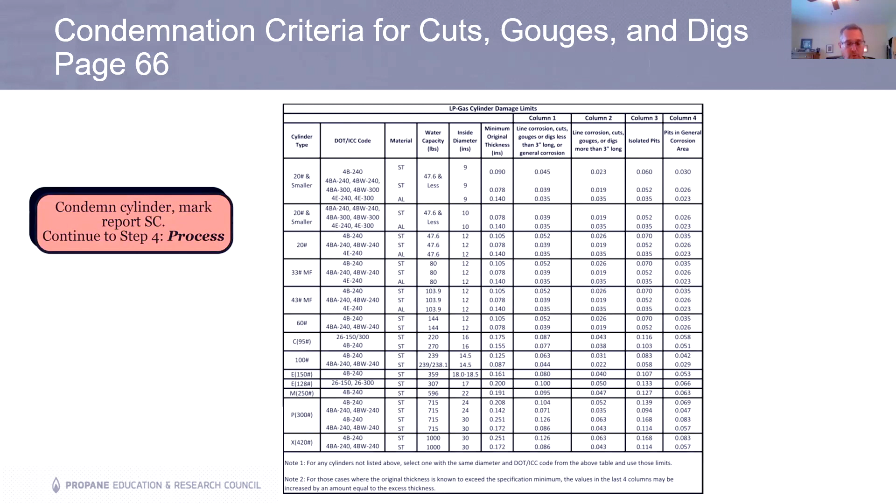That's what you want to look at, and it'll say all of those things right across the top of that chart. Column 1, whether it's less than 3 inches; column 2, we'll talk about line corrosion, isolated pits. We look at page 66 completely, select the tools required for damage from cuts, gouges, or digs. We're looking at a carpenter rule — you don't want to use a rubber mallet — and you want an industrial depth gauge.

Okay, you guys all with me? You feel like you're slowly bleeding to death yet? We'll have an opportunity for questions. If your phones are open, you can ask them now.

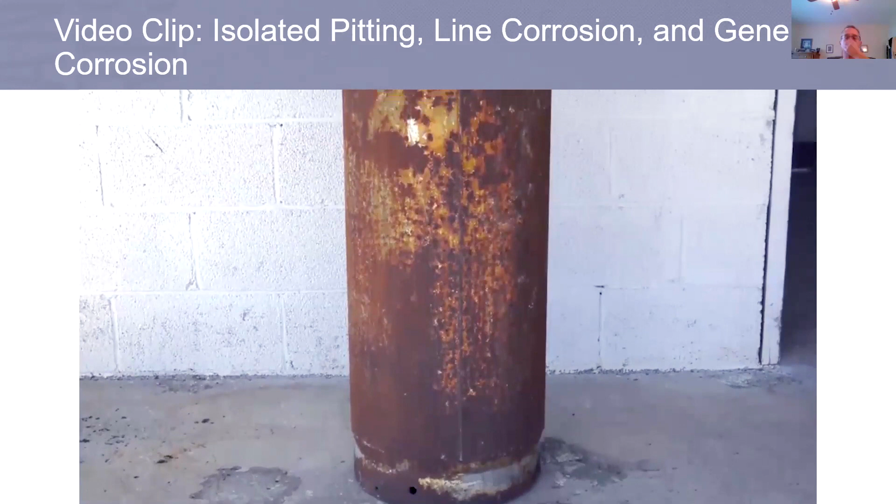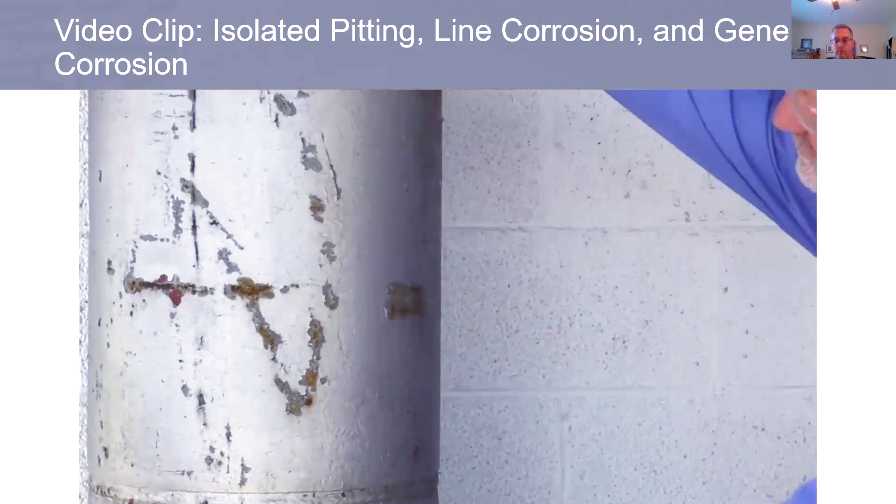As we've been doing, let's start with a short video and go to the book. The next step is to inspect for any significant evidence of corrosion on the cylinder. Corrosion or pitting in cylinders is a serious problem that results in the loss of wall thickness of the metal. The potential for a cylinder to fail may be related to corrosion in areas that are not readily visible, as in the case of isolated pitting. Corrosion that could cause a cylinder to fail may not be visible without close inspection of all areas of the cylinder. Dirt, paint, or rust can potentially cover an area of isolated pitting. This is part of the reason the cylinder must be cleaned before you begin the inspection. You must make sure to check the bottom of the cylinder inside the ring for corrosion during your inspection. This is the area of the cylinder most likely to get wet, thereby increasing the potential for corrosion.

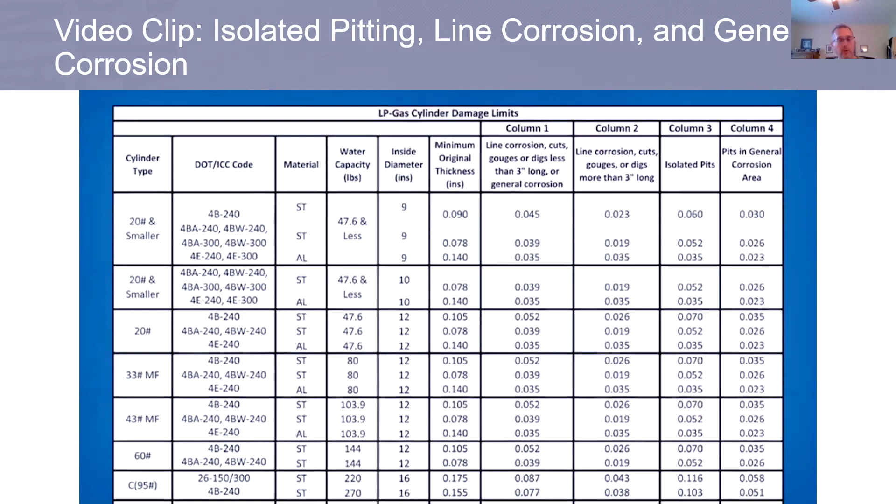To inspect the cylinder for corrosion, each type of corrosion is identified and measured. Be aware that when there is a cluster of isolated pitting in an area, figure the average depth of the isolated pitting to be twice the depth of any general corrosion. Based on your measurements and the damage limits shown on the LP gas cylinder damage limits table, determine if any of the isolated pitting, line corrosion, or general corrosion is outside of the specified damage limits. If you discover that any of the corrosion on the cylinder is outside of the damage limits based on your measurements, scrap or condemn the cylinder and proceed to processing. Specifically, scrap or condemn the cylinder when any of the following are present.

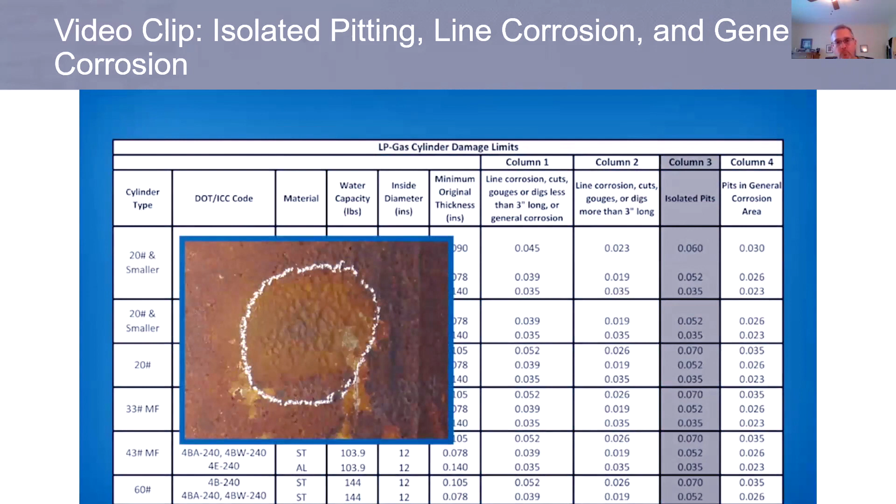Isolated pitting: the measured depth of pitting is greater than the maximum permitted depth shown in column 3 of the LP gas cylinder damage limits table. Line corrosion less than 3 inches long: the measured depth of pitting is greater than the maximum permitted depth shown in column 1, line corrosions less than 3 inches long, of the table. Line corrosion more than 3 inches long: the measured depth of pitting is greater than the maximum permitted depth shown in column 2, line corrosion more than 3 inches long, of the table. General corrosion: the measured depth of pitting is greater than the maximum permitted depth shown in column 4, pits in the general corrosion area of the table. Cylinders with any type of corrosion outside of damage limits must be scrapped or condemned. They cannot be repaired.

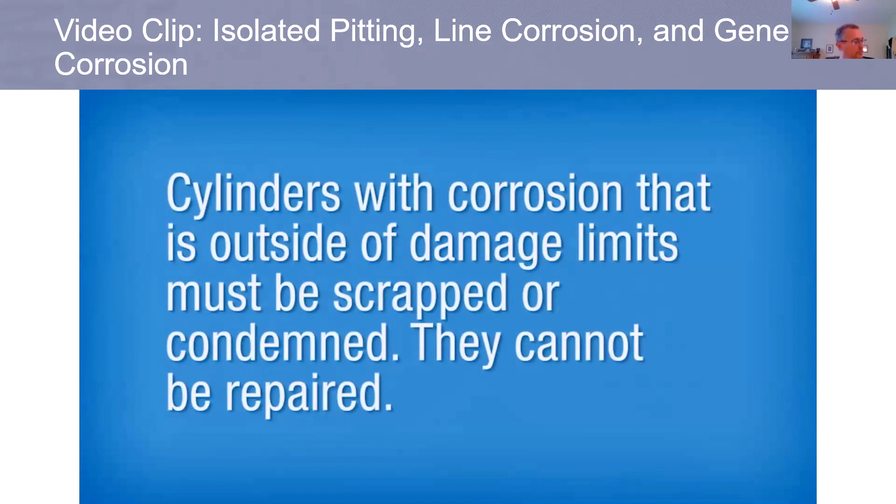Okay, so we're really talking about a similar table to the one we used on page 66 for cuts, gouges, and digs. The table you just saw is on page 72, right? So let's go through this a little bit. Again, cylinders are involved in all kinds of nasty environments or get banged around. We want to look for isolated pitting, line corrosion - which is just what it says, corrosion that's in kind of a line, either vertically or horizontally - and general all-over inspection.

Just like before, we'll get a carpenter's rule and an industrial depth gauge. We will measure isolated pitting as follows - and there could be a cluster of pitting as well - so you want to use the depth gauge to measure the depth of the isolated pitting in several places, similarly as we showed previously. Record the location, such as shell or head, wherever it may be, on a separate piece of paper, and continue until you have measured everything.

You want to measure line corrosion using a carpenter's rule. Measure the depth of pitting using the pit gauge. If crevice corrosion is present, use a scriber to measure the crevice corrosion and record the location and depth on a separate piece of paper, then mark it in your report as follows. On page 72 is the chart you saw in the video. If any of those things are out of tolerance, the cylinder has to be removed from the facility, set aside, and cannot be refilled. This is what we're talking about, okay?

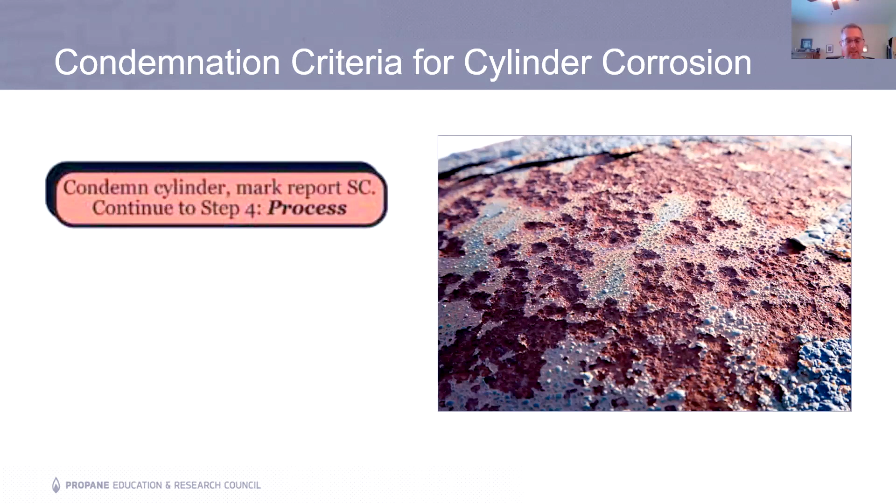Same sort of thing—we're talking about cuts, gouges, digs, and now corrosion. Outside the limits, it has to be condemned. You get a cylinder in, and some folks like to tar over the corrosion, so it won't look as corroded, or in the foolish thought that it will increase the tensile strength of the cylinder steel. If you ever see that, condemn it immediately.

Let's go to page 74 and look at a check for understanding. Identify the type of corrosion that is not defined in the cylinder requalification procedure—that's weld corrosion. We don't talk about weld corrosion so much here; we talk mostly about line, isolated, and general corrosion. As far as welds go, what did we say earlier? Any weld that's pitted more than 1/4 of an inch deep is being discarded.

You can't use it. We talk about this type of corrosion—in this course we're talking just general. Is it sporadic across the steel? Are there isolated pits that group together? When you have a large group of isolated pitting, that could really cause a deterioration of the steel and may not hold the pressure that's required.

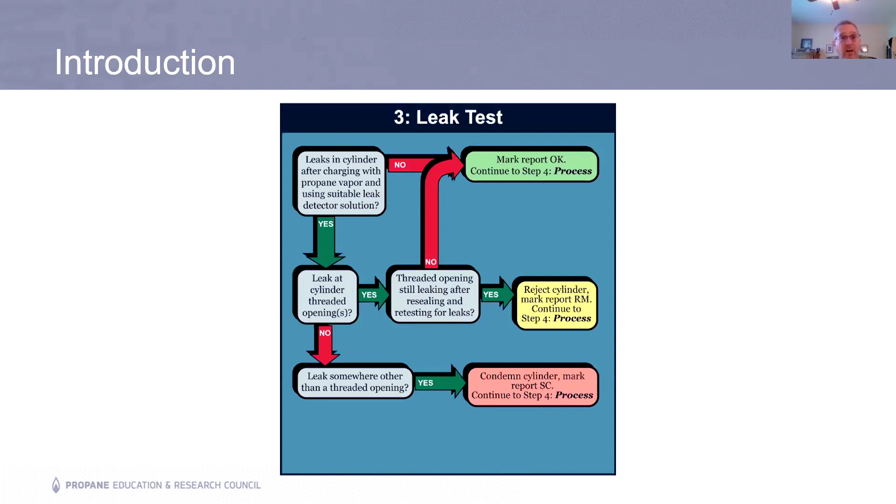As I mentioned, that's often not done just because of the finances of it. Now friends, we've gone through all of the criteria of the inspection on our foldout. We've gone through what I think is the most critical part, in addition to documenting, to ensuring that your cylinders are pretty good to go. But we've got another one before we decide how we're going to process it, and that's leak testing that cylinder under certain circumstances. So guess what we're going to do? We're going to show a short video, and then we're going to go back to the book.

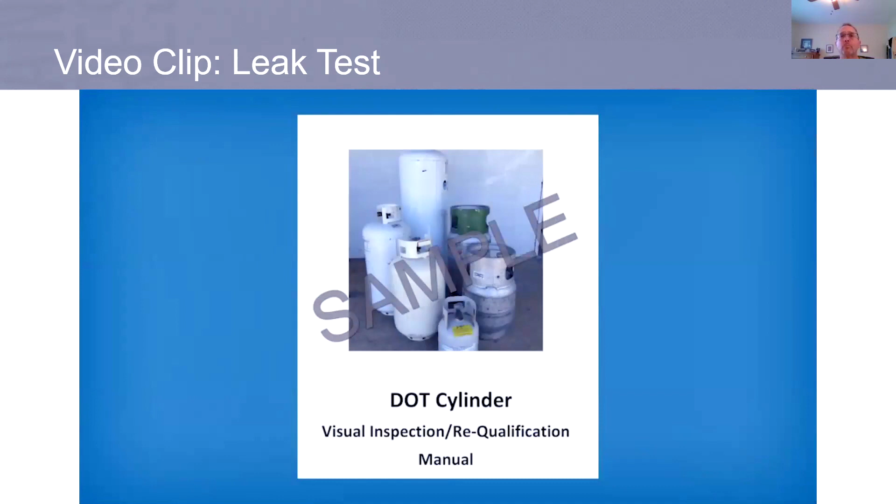Test for leaks. After the cylinder has passed the visual inspection portion of the requalification process, the cylinder must be tested for leaks before the cylinder can be requalified. Because of the possibility of a leak, this test should be performed by charging the cylinder with propane vapor. Do not use propane liquid. In addition to the leak test procedures described here, some marketers and cylinder manufacturers may recommend performing additional checks at this point in the requalification process. For example, your company may recommend exercising the actuated valves on the cylinder during the leak test. For more information about additional recommended checks during leak testing, see your company policy or the manufacturer's instructions.

To leak test the cylinder, install all cylinder valves and accessories using the appropriate wrench and thread sealing compound. Ensure the service valve is closed. Carefully move the cylinder to a filling station and connect the vapor hose to the cylinder. Carefully open the shutoff valve on the end of the vapor hose. Carefully open the service valve. Charge the cylinder until pressure equalizes. Shut off and disconnect the vapor equalizing hose carefully.

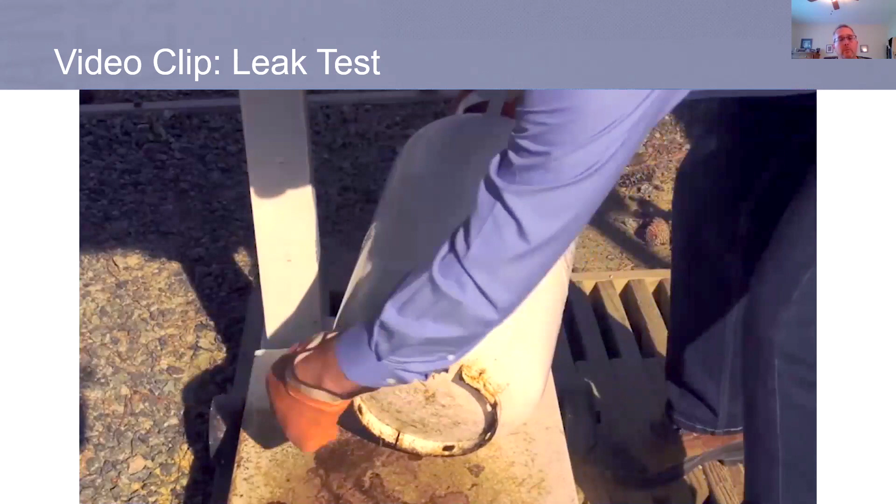If an electronic leak detector is used, operate the detector according to the manufacturer's operating instructions. If a leak detector solution is used, apply to cylinder valve threads, all welded seams, all points where neck and foot rings are joined to the cylinder body, and all areas that had severe corrosion, cuts, digs, or dents. Visually check all areas where the leak detector solution has been applied. Mark any area of the cylinder that is leaking if leaks are found. Bleed down the cylinder carefully. Close the service valve. If a leak was found, secure the cylinder in a safe area and call your propane supplier. If no leaks are found, the cylinder has passed inspection. Mark the cylinder as OK on the inspection form. Make sure you have documented the entire process and file properly.

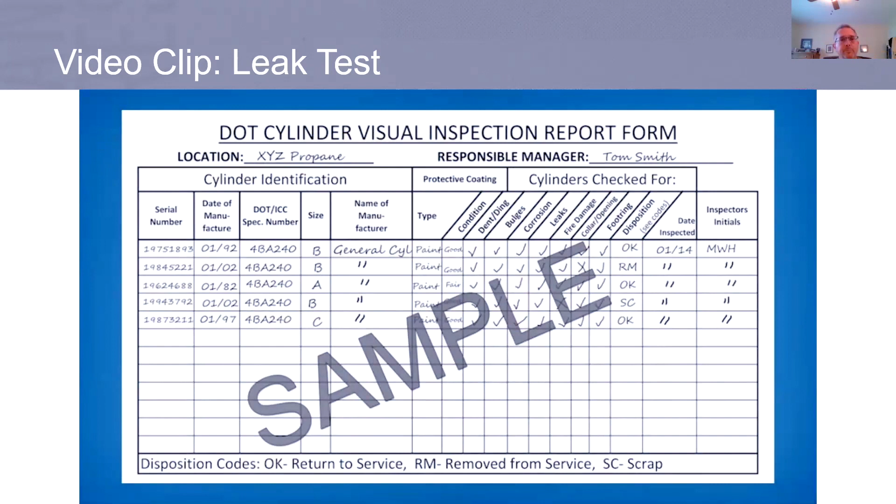Okay, so we've gone through all the criteria thus far that is in that fold-out chart in this example, right? And he marked it okay. We had the cylinder requalification date was proper. Fire damage was okay. Cylinder was not distorted more than 1%. Cylinder wasn't leaking. There were no damage to valve openings, no damage to attachments, no significant dents based upon our measurement and charts, no significant cuts, gouges, or digs based upon our measurement and the charts, as well as no significant isolated pitting or line corrosion.

We went over to the leak process, which is part number 3 in the process, and there were no leaks. We did everything properly. We marked OK on the form, and we are good to go.

All right, so again, we're checking for leaks, so we don't want to use liquid propane because it expands 270 times. Who wants to use liquid propane when we're checking for leaks? We always want to charge it with vapor.

Confirm the cylinder valves and accessories are properly installed. And this is the last part of the inspection process. Ensure the service valve is closed. Carefully move the cylinder to a filling station. Connect the vapor hose to the cylinder as you've been trained to do. Carefully open the shutoff valve on the end of the vapor hose. Carefully open the service valve. Charge the cylinder until pressure equalizes.

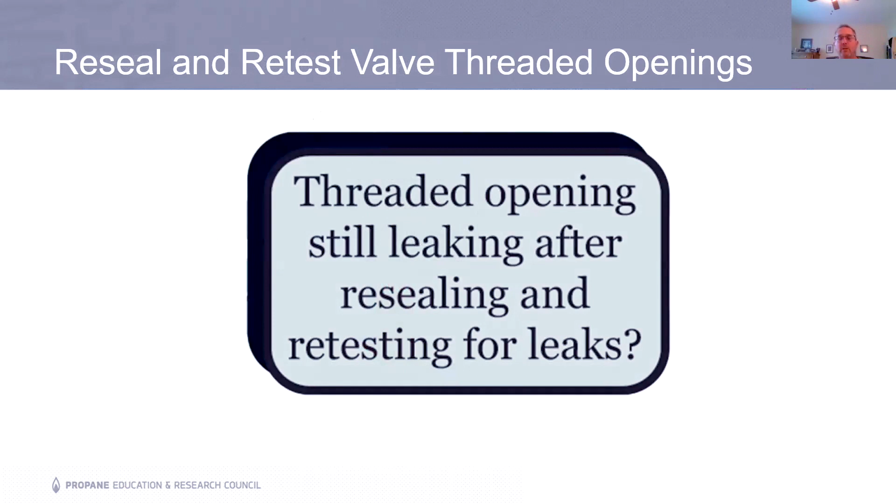Are the threaded openings still leaking after resealing and retesting? If that's what happens, set it aside. You can get further repairs, or you can scrap it. You want that noted on your report.

It's either okay, good to go, or if it's still leaking, it's not, so you either remove it or scrap it. That's the rejection criteria. Now we're going to process the cylinder.

We've pretty much done everything. Based upon what we've done, we now make the determination if it passed inspection and mark OK on the report. Mark the cylinder neck collar with the RIN, next requalification date, and letter.

If the cylinder has been rejected, the report is marked RM. Note the cause of rejection in your report. Mark the cylinder part or point that failed inspection with paint or waterproof marker. Repair or send for repairs based on your policies.

If there's a leak somewhere other than the threaded opening, you have to condemn the cylinder. You have to give it back to the owner and let the owner know, marking that in your inspection report.

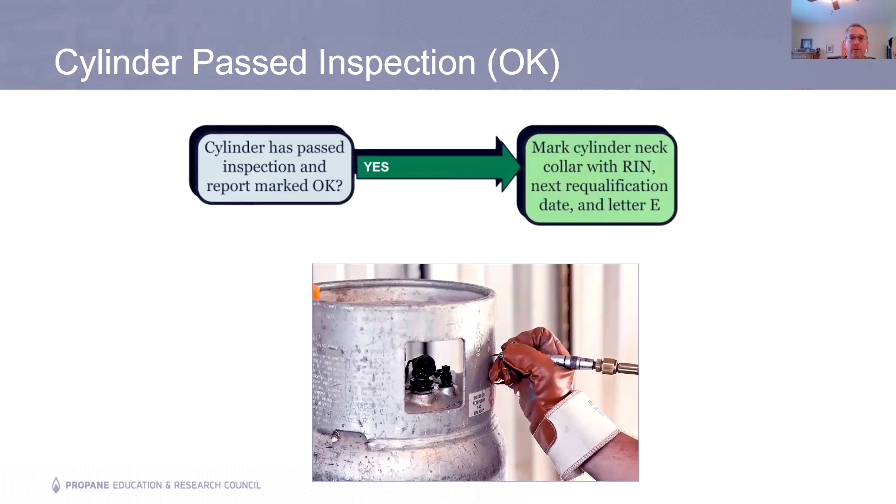Cylinder scrapped or condemned. Say this one has a leak, we decided to scrap it. Okay, marked SC on the report. We go to page 87.

Another check for understanding. If after inspection the cylinder needs to be rejected and sent for repairs before returning to service, which of the following items is not part of the process to reject the cylinder?

Render the cylinder incapable of holding pressure - that's not part of it. We're going to send it back to be repaired. That's all we need to do. We just need to set it aside, mark it as such, and mark that on your report.

Special qualifications for cylinders - we're not going to spend that much time on this. Manufacturers of composite cylinders, which are pretty cool but expensive, those cylinders will need a special permit for recertification. That's a little beyond the scope of this process, but within the NPGA fact sheet where PHMSA has links, that will indicate it better than what we can cover in this class.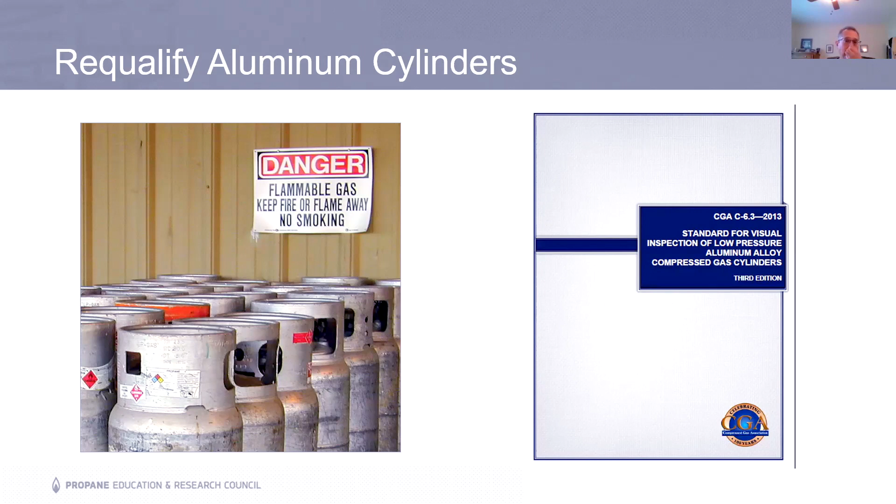If we look at cylinder requalification checks for steel and aluminum cylinders on page 91, there is a bit of a difference between them. As we mentioned earlier, fire damage to an aluminum cylinder means it immediately has to be condemned. There are some differences, not a lot, between what you use to condemn a steel cylinder versus an aluminum cylinder, and I'd encourage you to take a look at that. Some of them are very similar — dents away from welds is the same thing.

The fire damage is the big one. Some differences show up with isolated pits as well. Again, when you look at the tensile strength of aluminum being less than steel, it makes sense that there would be a bit of a difference between those two, in terms of wall thickness accommodation — what's acceptable and what's not.

So remember, if you get aluminum cylinders, and I'm sure you do, make sure you take a look at that criteria. I think that will make it a lot easier for you, especially on things like wall thickness and fire damage.

Other things — we talk about minimum allowable thickness for low pressure cylinders. Pretty much we're talking about an aluminum cylinder, but some have lower pressure and are used for different criteria. Those also have their own chart for minimum and allowable design thickness that may differ from steel cylinders. My sense is steel cylinders are the ones you're going to be looking at most.

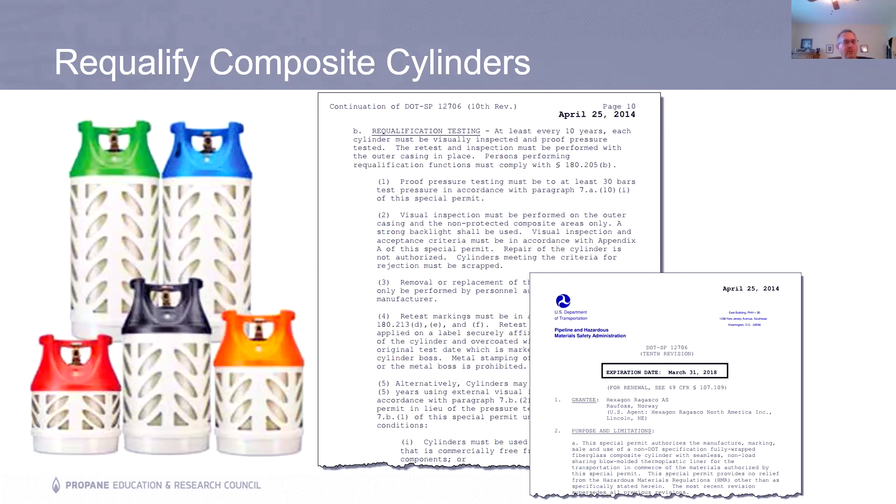Go to the manufacturer's instructions — I'm going to guess not a lot of you have seen those. Okay, we're now looking on page 94, cylinders in stationary service. We're going to talk about that a little, then we'll talk about motor fuel forklift cylinders.

You don't have to verify tare weight on these. Any damage observed that meets or is more severe than the rejection limits means the cylinder must be removed from service. The reason — not so much for the tare weight, it's probably not going to get banged around as much — but you'll do everything else as you would for a non-stationary cylinder. If damage meets or exceeds the rejection limits, the cylinder must be removed from service permanently. You can't repair it — remove it.

Motor fuel, forklift cylinders — OPD is not required for engine fuel cylinders used on industrial trucks. Horizontal cylinders exempted from the OPD requirement have to be marked. Hopefully they come that way, or if you sell them that way, you have to be mindful of that. The pressure relief valve must be replaced with a new one within 12 years of the manufacturer's date, and every 10 years afterward. Not required to have an OPD — but if the OPD is not present, the cylinder must be labeled to indicate this.

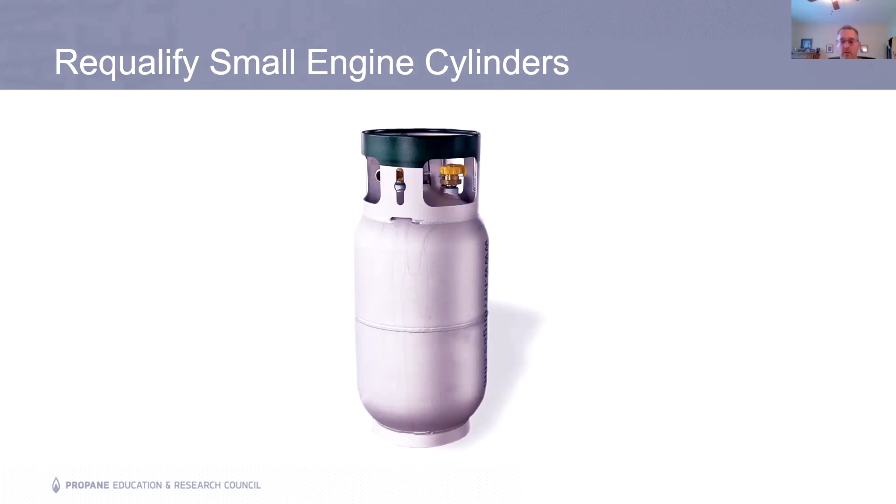That will indicate that they are not interchangeable with forklift cylinders. Last check for understanding: NFPA 58 allows composite cylinders to be used for propane service under a special permit issued by DOT. We know that that's true. I'm going to go through a summary, and then we're going to go through a quiz.

But before that, you just can't make some of this stuff up, friends. I have found in my almost 19 years being at PERC, the reason you have to document things is because people do things that you can't believe that they do. So let's take a look at this one.

Bradley County deputies pull a minivan over Tuesday night. It's just the beginning of a bizarre story. Deputies spotted the van traveling along Spring Place Road, and as you can see, it was easy to spot. An oversized propane tank weighed down the van, nearly dragged it to the road. County Fire Chief Dewey Woody says the driver hoisted the tank into the van by removing the passenger seats. He then used a chain that was attached to the steel base where the seat was fastened on the floor. Deputies say the tank's valve sprung a leak when the driver dragged it into the van. So to stop that leak, the driver plugged the hole with a golf tee. Firefighters quickly stopped the gas leak and made sure the man got a trailer to haul the tank away safely.

All right, he stopped it with a golf tee. I know he got that, but it's a good thing—Chief Dewey Woody, who I want that name. Stu, wasn't he supposed to use saddles when he transports that? I'm gonna have him call your company. Okay, but these, yes, you're right.

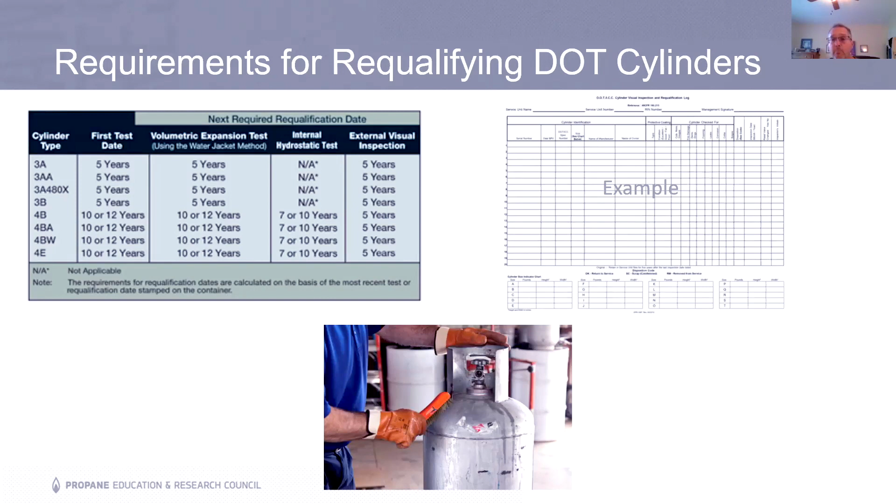Whether you have this electronically on a tablet or not, I don't know, that's not a bad idea. But I would also keep a paper copy, just because things happen with tablets and computers. Prepare the cylinder for inspection by emptying it, removing any rust, scale, paint, or dirt, and marking any potential problem areas.

Prepare it, inspect it, leak test it, and then decide the process. Are you going to condemn it? Reject it? Or say we're good to go, you can fill it. This is the entire decision tree process. If you can understand this, and the criteria based on the charts and tables we looked at, then you're good to go.

Just have to make sure that you're consistent. Consistency is really, really important.

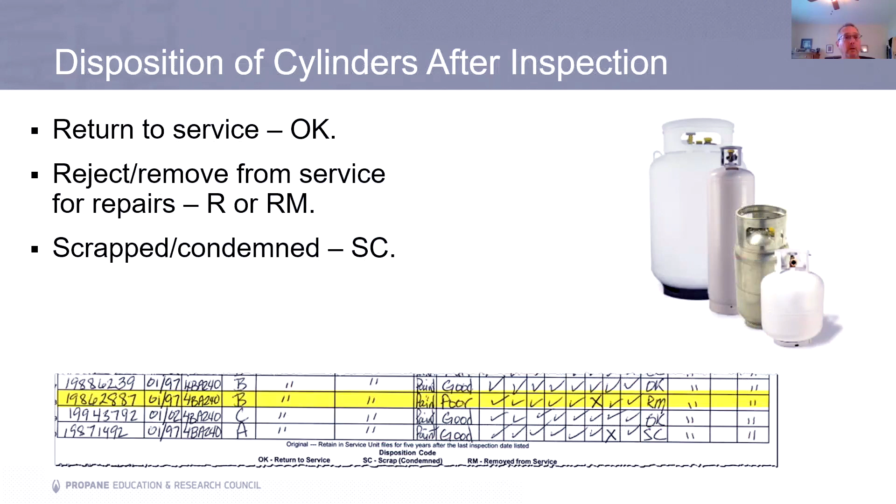Disposition of cylinders after inspection on your form: it's either going to be okay, R, RM, or SC. Mark cylinders that have been out of date and need to be marked again that pass inspection. It's going to be marked okay with the RIN and a requalification date followed by the letter E, because it's just been inspected and you're good to go, now putting the new inspection date on it.

Cylinders that are rejected during inspection must be marked RM with paint or waterproof markers, same with a cylinder that is scrapped. However, cylinders that are condemned or scrapped must be stamped with XXX over the DOT specification number and pressure stamp, or stamped with condemned on the neck ring, top head, shoulder, or rendered incapable of holding pressure. How do you render it incapable of holding pressure? Take the valves off if you don't have a stamp.

Special requirements, we talked a little bit about that: aluminum cylinders, composite stationary cylinders, motor fuel and forklift cylinders are not interchangeable with each other.

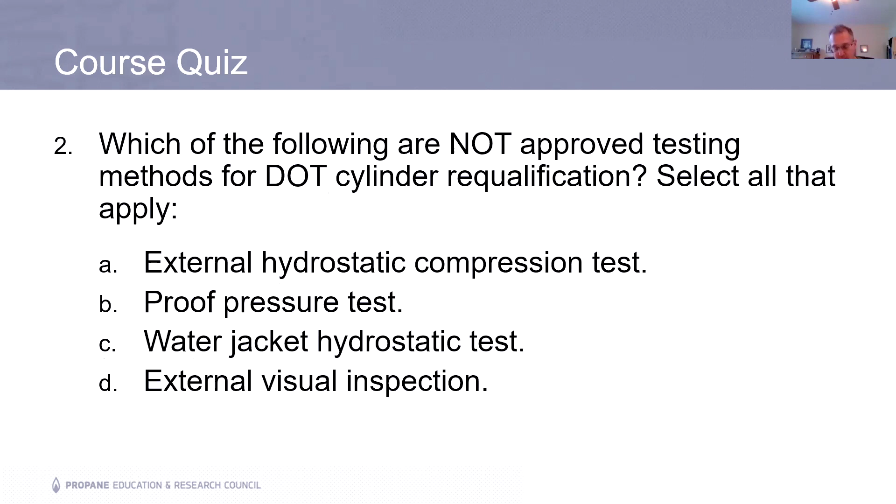My soapbox talk. Which of the following are not approved testing methods for DOT requalification? External hydrostatic compression test - there's no such thing as that. There's an external visual test and there's a water jacket hydrostatic test.

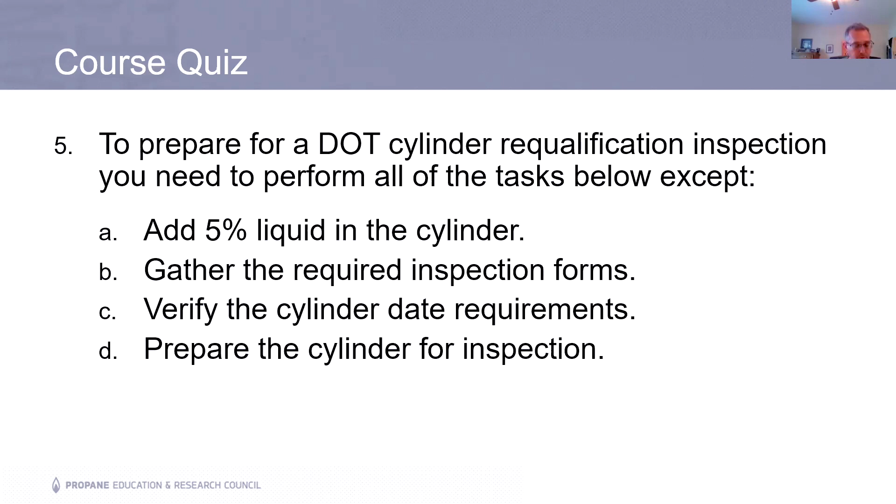Number 5: to prepare for a DOT cylinder requalification inspection, just preparing for it, you need to perform all of the tasks below except A. We don't need to add 5% liquid to the cylinder. We need to do those 3 things beyond inspection forms, cylinder date requirements, and preparing it for inspection, such as cleaning the cylinder.

If the last requalification date on a cylinder is 03, that's March 2015, E, external visual, when is the next requalification due? Well, it's 5 years, due March 2020. Okay, we look at the date that's on there, we look at the letter. If it's an E, it's within 5 years.

Match each picture with the type of damage that it shows. Let's go to our book on page 109. If we look at the picture on A, well, that looks like some valve damage there, and it also looks like some green corrosion, which is often a sign of illicit use of making methamphetamine.

Now, if you can get the cylinder from somebody that has this, go ahead. If not, mark that and consider calling the authorities about that one. Follow your company policy on that one.

B, the cylinder in B looks like a lot of fire damage to me. On C, we're looking at corrosion. On D, we've got some dents, if you could see on the top left side of the cylinder. On E, we've also got some damaged attachments there, the neck ring looks pretty well damaged. And on F, it's a little hard to say - it's maybe a little bit of corrosion there.

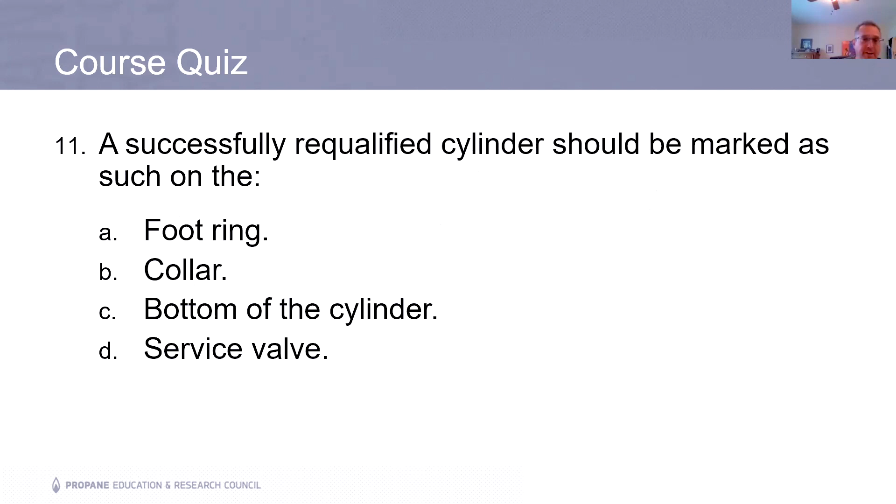Verbally notify the cylinder owner that the cylinder is condemned and cannot be filled, offered as hazardous material for transportation in commerce. What you do beyond that, and of course you want to document all of that, you don't own the cylinder.

As we mentioned, you could say goodbye to the customer, offer them a new cylinder at cost, or provide them with a new cylinder at your cost. You cannot take it away. You don't own it. Number 13, aluminum cylinders that have been exposed to fire must be immediately removed from service, condemned, or scrapped.

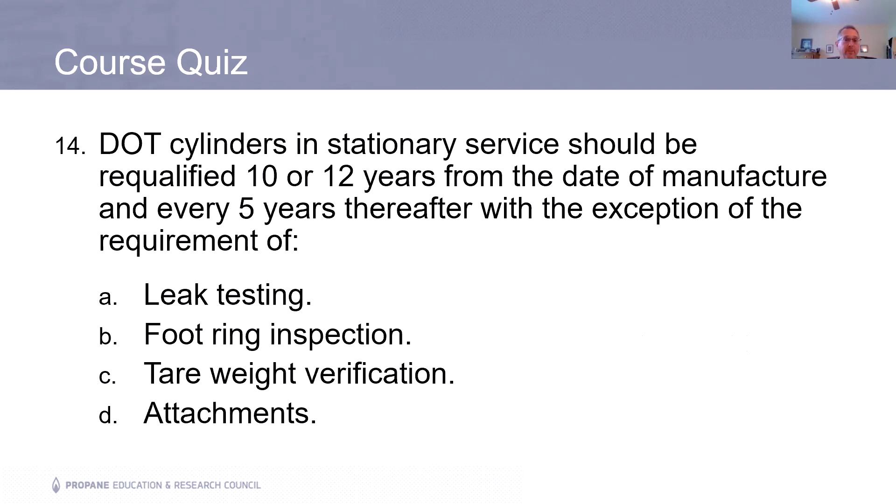Full stop, end of story. Number 14, DOT cylinder in stationary service should be requalified 10 or 12 years from the date of manufacture and every 5 years thereafter, with the exception of the requirement of tare weight verification. We're going to look at everything else, leak test, look at the attachments, don't have to do the tare weight verification. Why? It's speculated that they just don't get knocked around a lot. They're not going to see a lot of that damage to them as you would otherwise.

15, engine fuel cylinders used on industrial equipment, such as forklift trucks, are not required to be equipped with what? An overfill prevention device. No OPD. Number 16, isolated pitting or line corrosion could be missed on visual inspection if you don't...

A, remove all dirt, paint, and other rust from the cylinder before inspection. Sure, if you've got some dents in it, you can't find that. A lot of things you won't see if it's not cleaned off.

You are inspecting a 100-pound 4B240 cylinder. You know that because it says it on the collar, or it's on the top of the cylinder. That has an area of line corrosion measuring 5 inches long, the depth of 0.034 inches.

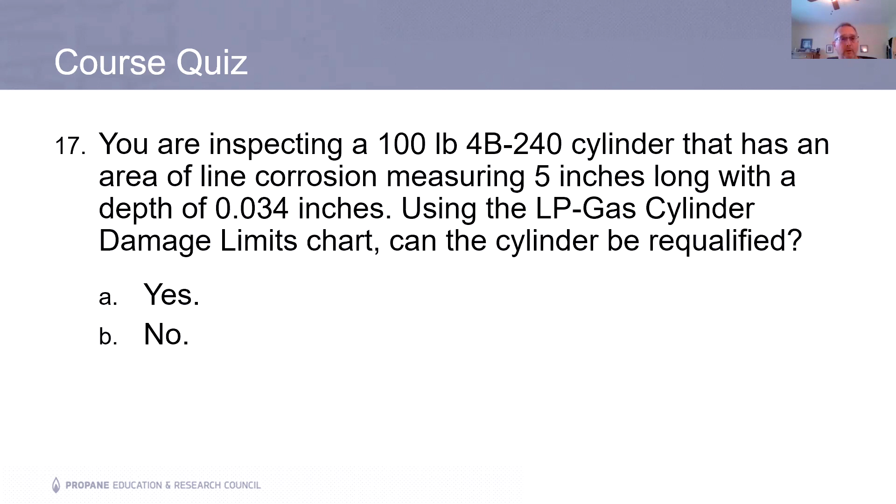Using the LP gas cylinder damage limits chart, can that cylinder be requalified? And the answer is yes. If you look at the chart and you look at something that is measuring 5 inches long, the maximum is 0.035 limit. You've got 0.034, so we're good to go. Again, looking at the nomenclature, knowing what we're looking at, knowing it's a 4B240, 100 pounds, knowing how to use our charts and tables, we'll make the right decisions all the time.

18, and if you want to know, there's 24 questions to the quiz. You are inspecting a cylinder that has a dent on a weld. The dent has a depth of 0.29 inches. What should you do? Reject the cylinder.

Maximum a quarter inch deep on a weld has to be rejected. 0.29 inches is greater than a quarter inch, which is 0.25 inches, so it has to be removed. Any dent on a weld greater than a quarter inch deep, or 0.25 inches, you have to say goodbye to.

19, you determine the minimum allowable tare weight for a specific cylinder to be requalified. Multiply the marked tare weight by 0.95, no more than a 5% loss. If it's less than that, it has to be requalified or condemned.

20, there must be at least 5 continuous full threads for tapered cylinder neck threads to pass qualification inspection. We saw that picture of the threads and how they were damaged.

There has to be 5 of them, not 4, but 5. Question 21: if a leak is found at a threaded opening, you may reseal it and test it again for leaks. Very important, leaks on a threaded opening.

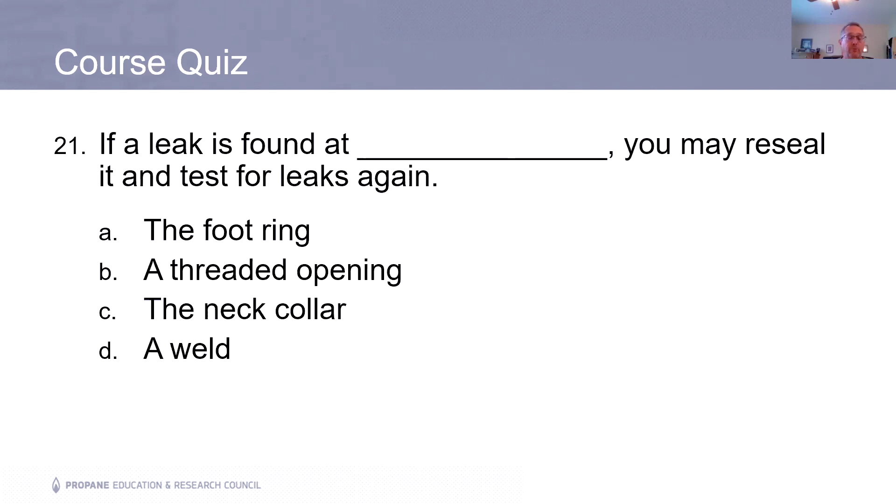Question 22: if the cylinder is rejected during a requalification inspection and marked RM on the report, you should mark the area of the cylinder that failed inspection with paint or a waterproof marker, like a Sharpie.

By the way, if any of you have grandchildren or small children, do not have Sharpies in your home, especially those that do not come out. I've learned that through my years of parenthood and grandparenthood.

Small engine cylinders are very similar to forklift cylinders, except that they typically have left-hand threads on male and female safety couplers. That is why they are not interchangeable. Friends, as you look from page 115 onward, there's a lot of great reference material there, including a copy of a visual inspection method application.

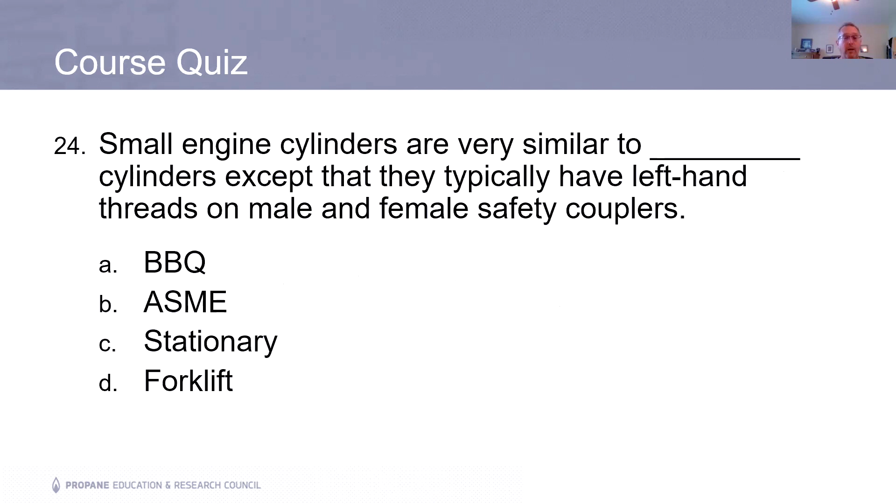I want to end the way I started, a little bit on my soapbox if I may. I've dealt with a lot of people that look down their nose at people that wanted to help keep them safe. It's a testament, folks, like Billy's bringing his people on and taking the class himself. I think that's fantastic. I love when people do that.

Many times you hear from managers, bean counters, say incidents and accidents are down, guess we don't need to invest in safety anymore, they say with a chuckle. Well, there's a notice that says no hiding in the restroom during safety meetings. I like to have a good laugh too, but I think that pretty much undermines what we do in the safety field.

You don't have to be a safety professional to be a professional. There's only one way of doing things: you do it professionally. Professionals do things safely. I'm fine for a good joke too, but it undermines us. I want to leave you by saying, I like a good laugh, but it's all fun until someone gets hurt.

Friends, I have never had to go to a spouse's home and tell them their loved one is not coming home because of an industrial accident, because maybe they did something they shouldn't have done or they listened to a fool. I've never had to do that. I know some folks that have, and there might be some in this class that have. To a person, it's a life-changing experience. They never forget it, they never get over it, especially if they're a supervisor, whether or not it was their fault.